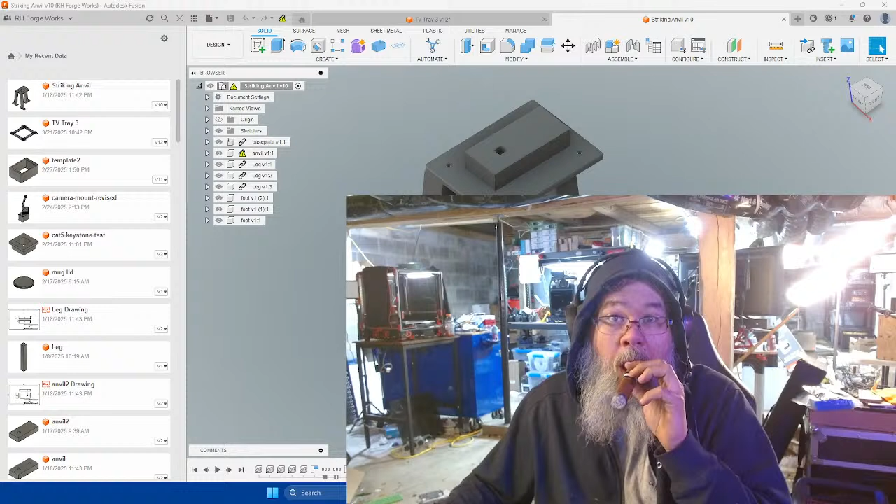See if I can make me a little smaller so I'm not taking up so much space here.

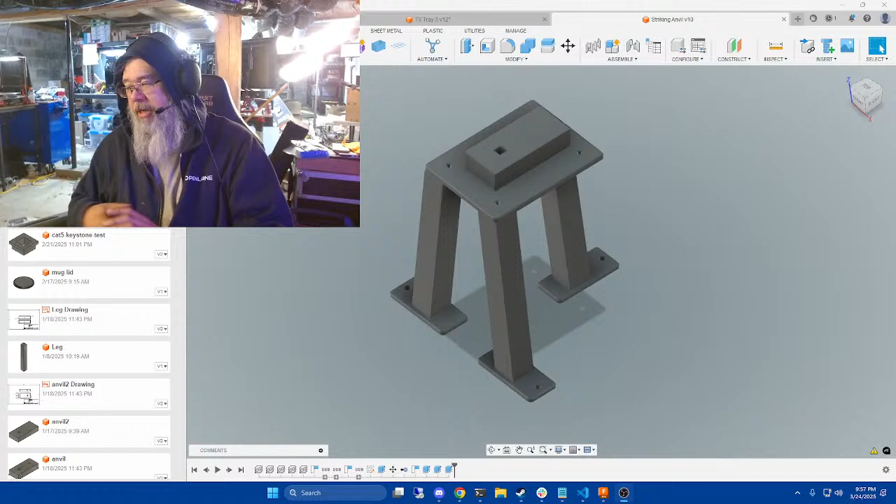Kind of done this before. It's kind of gonna, I'm kind of gonna. What you kind of gonna do? So I really had no major plan. I was playing with something in OBS, trying to make things not suck. So anything I can do before my next actual forging stream, if I can do that now and clean some things up now, that's what I'm trying to do.

I did get some new goodies for the stream. Unfortunately, no new cameras, because some asshole decided he wanted to run the auction bids up to like $200 on these cameras, which I wasn't going to pay $200 for.

I was hoping to add 3 or 4 new, but they're not really new. I mean, they were like top of the line in 2011. They're not so much top of the line now, but they would have been a nice addition, just not to the tune of $200 a pop.

So I stopped bidding on those once that dickwad decided to start running the prices up like that. If that was you, I just want you to know you can go fuck yourself. I don't necessarily think that was any of y'all, but you know who you were, Mr. Green, or was it Grass Valley LDK 3000, running that shit up to $200.

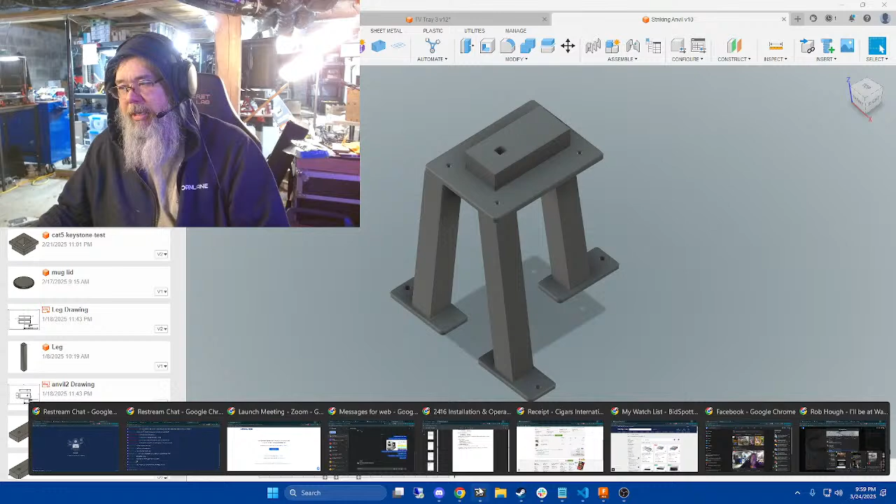Yeah, I got something for you, I got two of those for you, by the way. Two of them. That dude, it was no bueno. Honestly, just looking at those cameras, I mean they would have been handy, but I don't necessarily think they were going to be perfect for what I wanted.

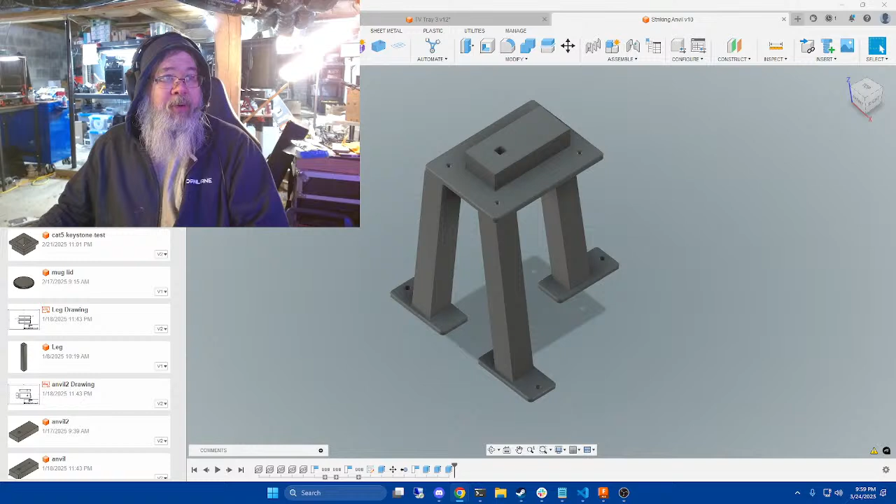Like I said, they are a little dated. Let me see if I can pull one up here real quick and show you guys what they look like. I think we're a little dated, but again, it was one of those - if I could have nabbed it for 50, 75 bucks, then it would have been a handy little addition to the stream.

So the big benefit to this camera, for those not in the know, is the SDI output, which is a bit more robust connector than HDMI. HDMI cables are really kind of delicate, so if you look at one wrong, it tends to break.

I currently have in the shop two completely dead 25-plus foot HDMI cables, so I'm going to have to order some new ones eventually. But SDI will stand up to the abuse a little bit better.

So this camera could have done some things that I wanted it to do, but like I said, $200 though, that would have been a little spicy. I'm not trying to spend that.

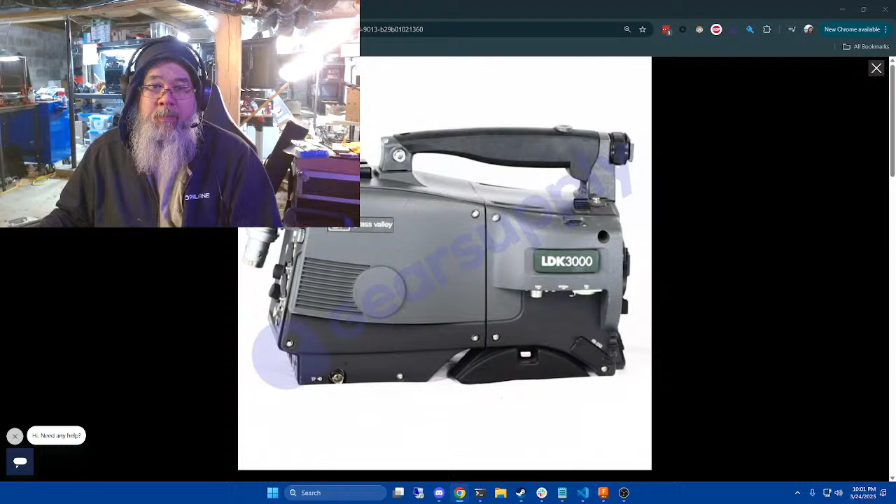I mean, if I'm going to spend high dollar on a camera, I want to move up into something a little bit better than what I'm currently sitting on, which the cameras I use right now are - what is it - the Panasonic G7s, I think, are what I'm using. Let me pull one up just to check. Yeah, that looks like the camera I'm using now. I'm pretty sure it's a G7. There's not a box sitting right here.

So the two anvil cameras that I typically use are... it's a pretty good camera though. Most of the issues I have with the camera are because I'm a moron, not because the camera sucks. It's mostly the operator. Every time I've actually sat down and read the documentation or looked up some stuff on them, I've had no problems.

But that's a pretty decent camera. I mean, it's a little dated as well now, they're a little older, but you can get them relatively cheap. This is a GH7 - this is not the camera I'm using. I did not pay $2,000 for that camera, by the way. This is more like... this is a G7, there it is, so this is closer in line. I still didn't pay this much for it, I got it cheaper than that. Like I said, it's a little older camera now, so you can get these cameras - not for $50, but relatively cheaply now.

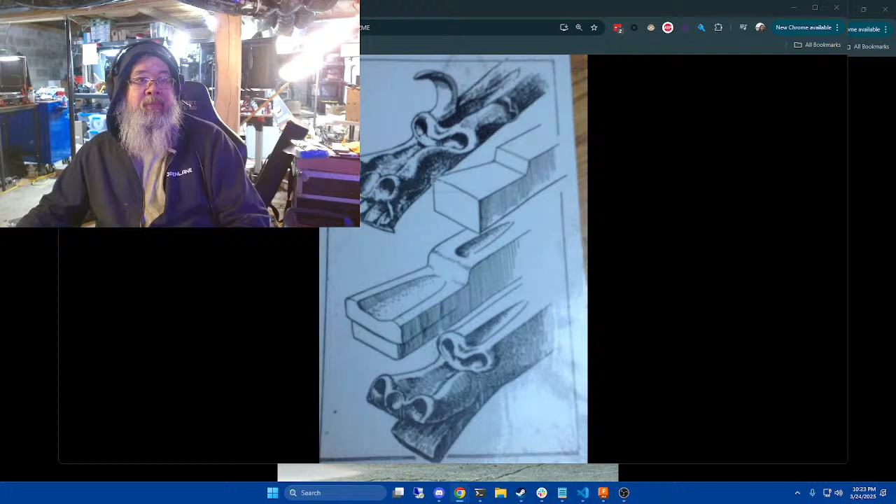It's great. So another thing I considered, I've not ruled this out yet, for the foot, is to do a dragon's head on the end and make that kind of the foot. I thought about that a little bit, but I don't want the horns. I just want something different, just something forged that when people look at it, they go, 'Oh man, check that out, that's forged.' I just think it's kind of cool.

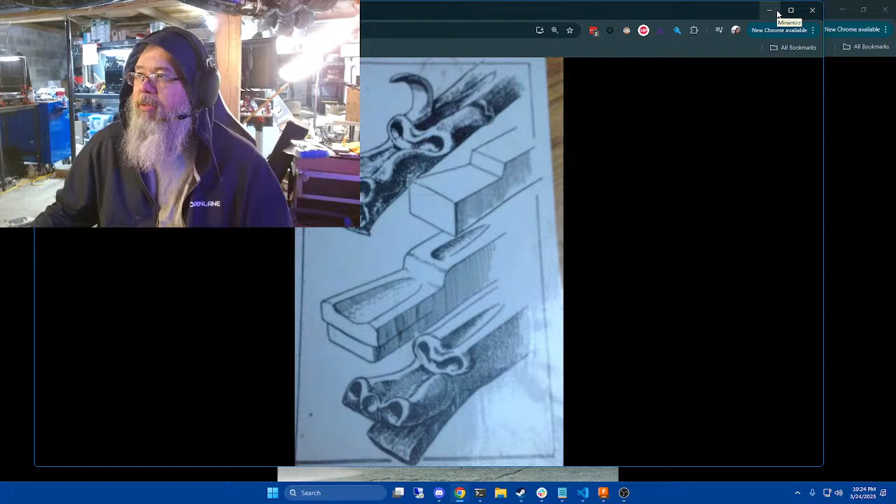I had originally thought to myself, man, I'm not forging this table, that's dumb, I'm just going to fabricate something. But the more I thought about that, I realized I'm not into the nostalgia of things for the most part. But at the same time, this forge table is big enough and cool enough, it deserves more than me welding a bunch of big angle iron together. Honestly, I'd rather save that stuff for some swage stands anyhow. It just commands a little respect. And that forge, I don't ever intend to really move anyways.

So I actually have one in its place right now. It's a cast iron forge table, not as big, but it's there right now. That one's going to get moved for the big one eventually. I'm gonna guess that thing weighs every bit 500 pounds. When I pick it up with the tractor and hit a bump, the tractor goes rocking and rolling from that momentum, that weight bouncing on the forks. Yeah, it's a heavy thing.

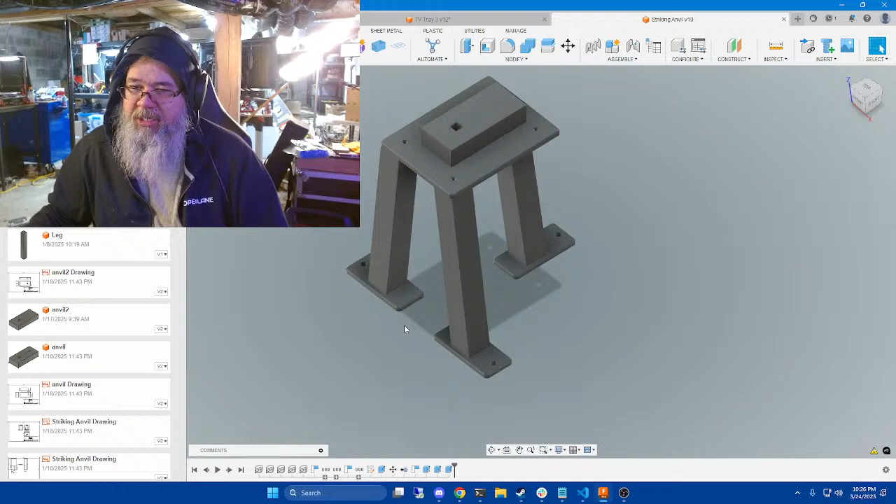Let me see if I can find... oh, that reminds me, striking anvil, we're not gonna go over that, we've talked about these a bajillion times. Let me just reiterate: no, please do not use forklift tine for your striking anvil plates. Please don't. If you want to use that for a keyed-in anvil, that's cool, that's fine. But trying to fix these when you've dinged up your hardy hole, when somebody's put forklift tine up here instead, man, it's just brutal, dude. It sucks. Just don't. Stick with mild steel.

You're not gaining really much of anything by going to forklift tine. You're not. I get it on a keyed anvil, I get it, I suppose. I mean, if you're gonna do that though, you might as well get the damn thing hardened. If you're gonna go through all that. But my mild steel keyed anvil is fine, and it doesn't take much to clean up if I need to. It really doesn't take much to clean them up. So that's the keyed anvil.

I got a TV tray in Fusion here I was wanting to look at. This is kind of funny. Here it is.

There it is. So my greatest accomplishment with this infusion project was figuring out this joinery and these damn things.

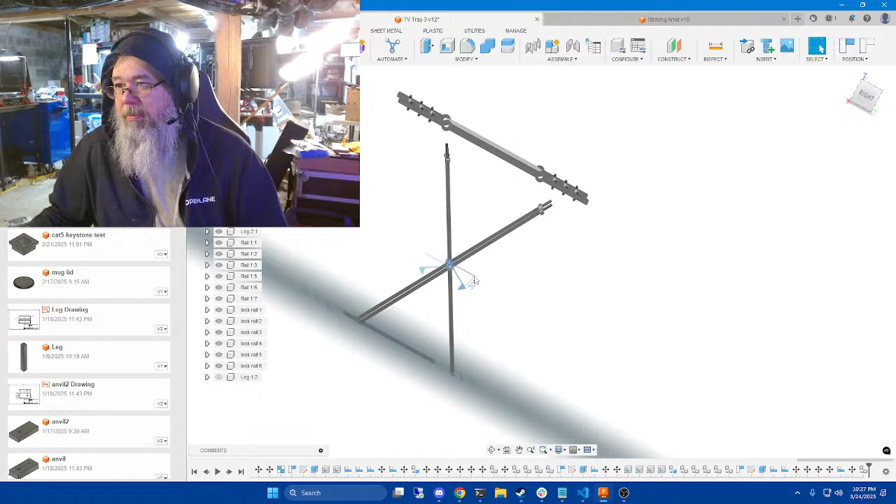It's not working right now. I don't know if I'm clicking on the wrong buttons or what I'm doing. But I got to a point where I can move these in and out independent of one another. I don't know why it's not working now.

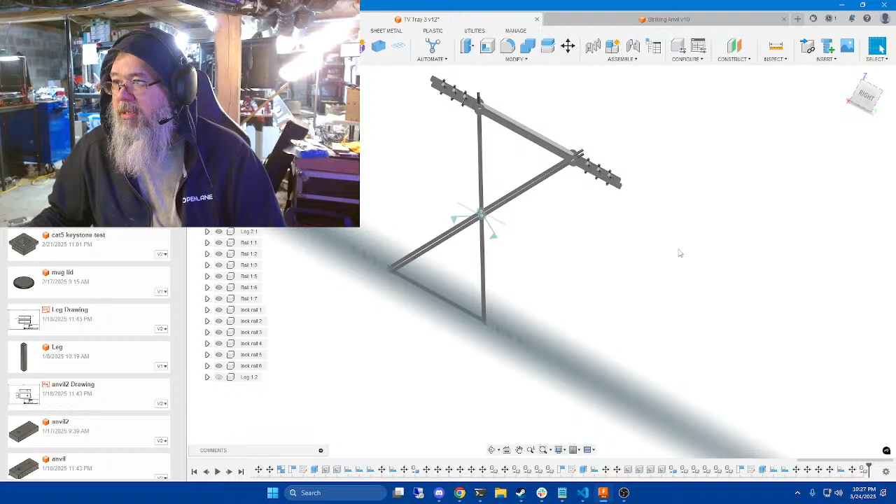What's nice about this is I realized one day that I could actually send these rails to Send Cut Send, and they'll just plasma cut them out perfect every time, and have them powder coated. I'm not gonna do that, but I had a good laugh at it. Derek Melton and John Perilou poking the bear with all their non-blacksmithy stuff, doing blacksmithy stuff with their plasma tables. I thought about this and realized I could actually do that.

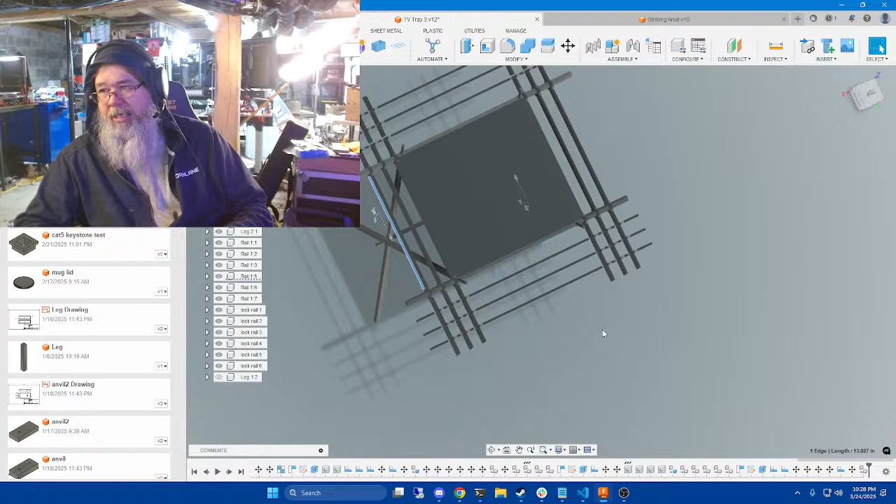It made me laugh. But if you're looking to make one of these, they're relatively simple. The hardest part is getting folks to take their time and lay things out cold. Everybody seems to want to rush through it, and that's where I tell you they tend to screw up the most, this measurement.

On this rail, because this rail is essentially what holds your legs apart and keeps it from collapsing. But for whatever reason, this one tends to get screwed up the most, and I think it's because there's an offset there that people don't account for sometimes. They just measure it once and then they screw up. Every time we've done a class with these, that's the spot where people screwed up.

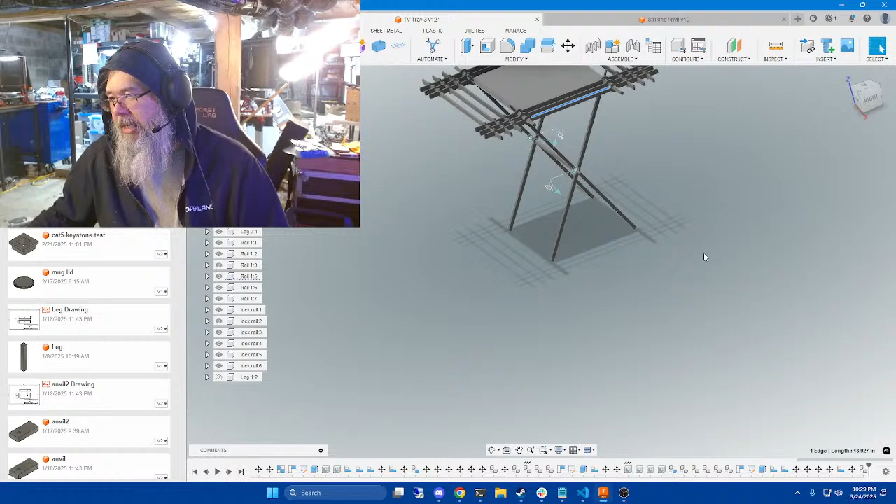But yeah, just take your time and lay things out cold. They come together relatively easily. There are little tricks you can do to make it easier, but it's not that hard really, it's just a matter of taking your time.

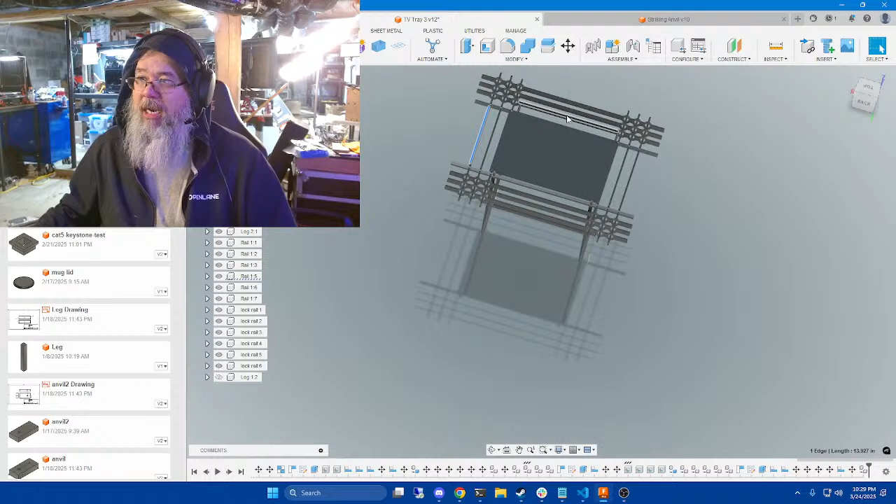If you use quarter by half versus quarter by three quarter, the biggest trick is if you're not dead nuts on the quarter by half, boy will it tell on you quickly. Where the quarter by three quarter, you've got a little bit of fudge room, so you could be a little off and get away with it.

I will say, Brian had originally suggested using the quarter by half, and I thought he was crazy simply because of how much harder it is. But what I've come to realize, having done one with half inch rails, is they don't look really that dramatic when you open those holes up. The half inch is really dramatic, really stands out versus three quarter.

Three quarter, you almost got to open it up to 7/8 to get that same kind of wow factor, which you don't really need them open that big. But yeah, you just really want to take your time, get everything laid out cold, and then execute. Be very deliberate.

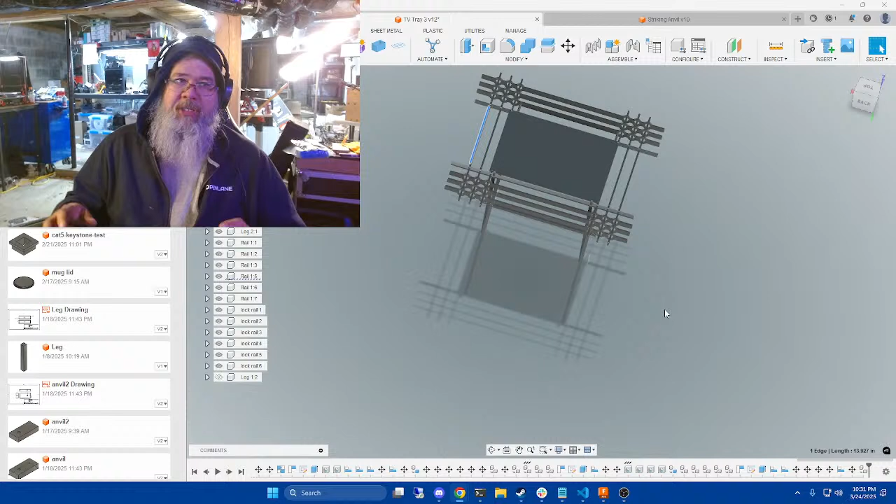I have found once you start to get into the rhythm of it, you almost kind of find yourself in a zone, and you just start doing the thing. And if you've got an induction forge, let me tell you, an induction forge makes these kinds of projects very, very easy.

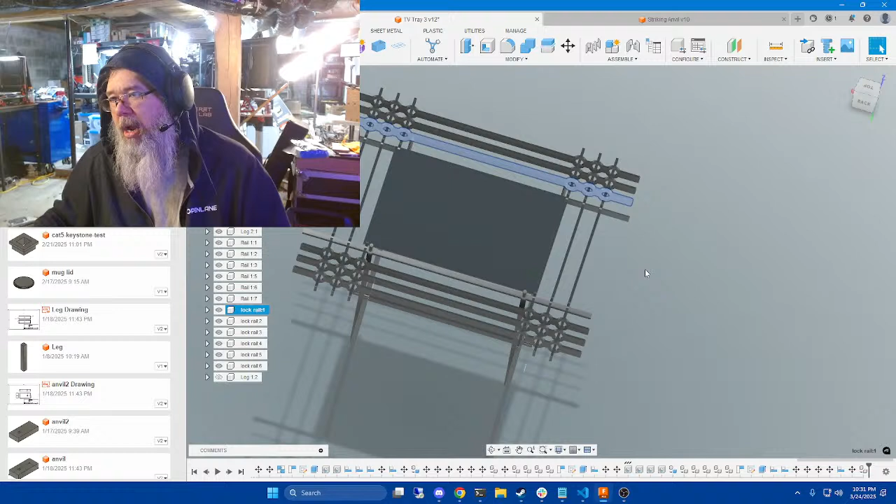Because you're going to be able to isolate your heat right on this hole, right in here, at a very high heat. So you can do a lot of different things. I've also found, one of the things I did on one of mine is I forged a horse head on one of these rails just because I wanted it to be different.

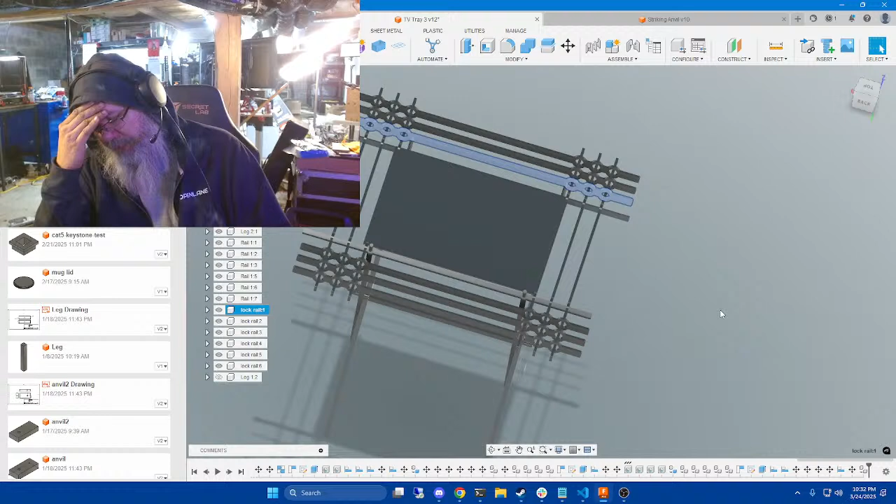I get that way. I know enough about myself to know that I'm one of those people that can't just do the thing because that's the way it was always done. I've got to throw my flair at it a little bit. I just posted some S hooks, and I hate forging S hooks, but I had just posted some on Facebook that I'd done. Same with those S hooks.

I always look at things like that and try to ask myself, how could I do this a little differently, and step outside of that box, and make this what it's supposed to be, but make it different enough to make it stand out a little bit.

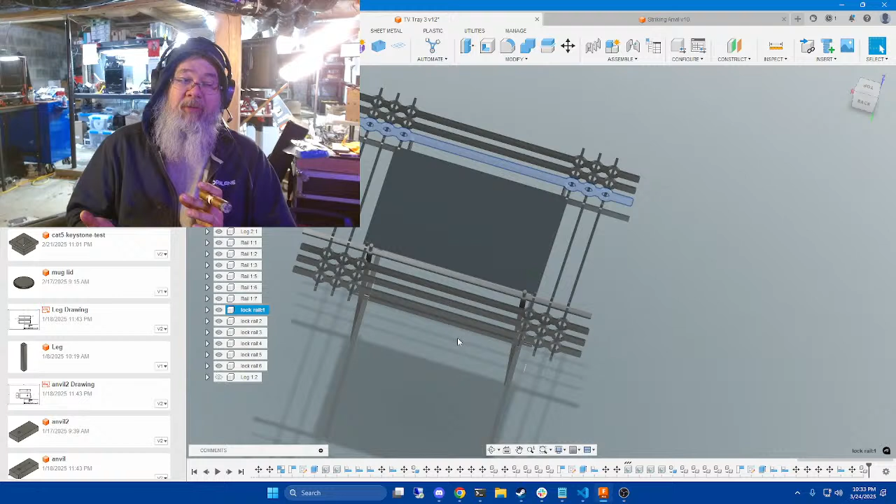From a forging perspective, one of my favorite things to do is drastically change the cross section of the material and leave the original material there so people can look at it. I think it's what I love about doing hammers, especially if you stand up an original billet next to one. You see that transformation.

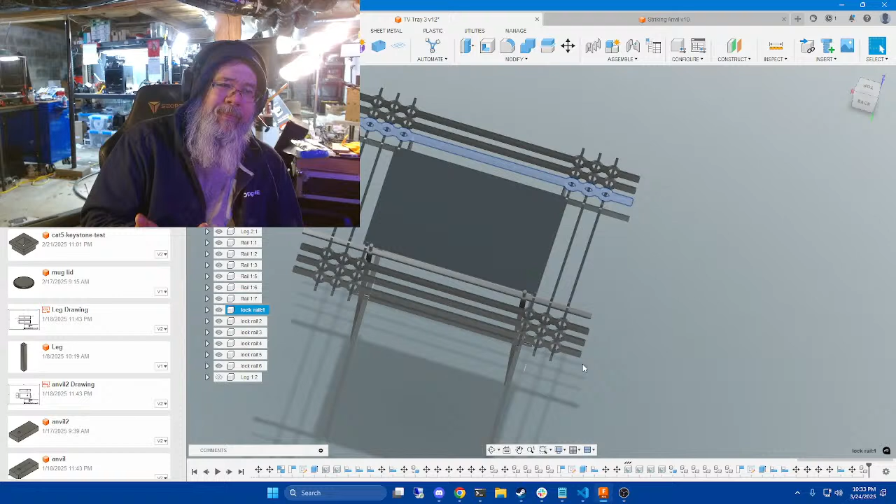I did an S hook like that, quarter by three quarter, and I left a little portion of the three quarter by quarter intact in the middle, just to show that that's what it was. I did a similar one at Coal Iron Works on one of their hammer ends. I took a piece of half-inch bar and did the same thing, but left it a true half inch in the center, then did the rest. It's one of those things where your everyday person looks at that and has no clue what's going on.

But a blacksmith would look at it and go, 'oh damn, check this out.' They would be in the know, most of them would be. So that kind of stuff, I like that kind of crap.

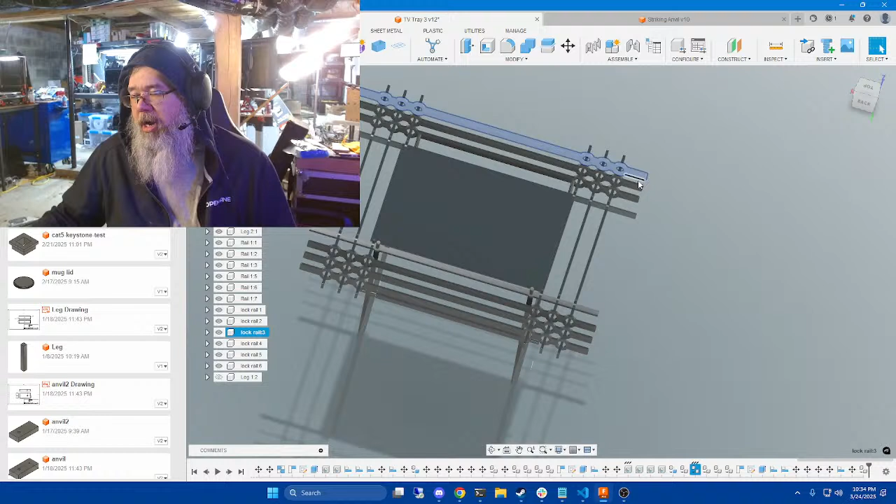Anytime you can, you know, your TV tray is going to work just fine like this, but I forged a horse head on the end of one of these bars just because I wanted it to be a little different. I wasn't even sure it was going to work, and it worked fine. You can see it, and it's there.

An induction forge will make this kind of project easier. It doesn't have to be a TV tray per se, but if you're going to do this many pass throughs, it makes it so much easier and saves you a lot of time. I can't tell you how many of these rails I have burnt up in a coal forge. Nothing's more frustrating than punching 6 holes in a damned rail and then burning the thing.

Oh, you want to hear Rob get spicy? He wants to hear how spicy my language can get. Be in the shop when I do that.

There's at least 3 of those in my river now. I think they made it to the river. Several of those have been chucked from the back door of my shop, followed by a lot of expletives.

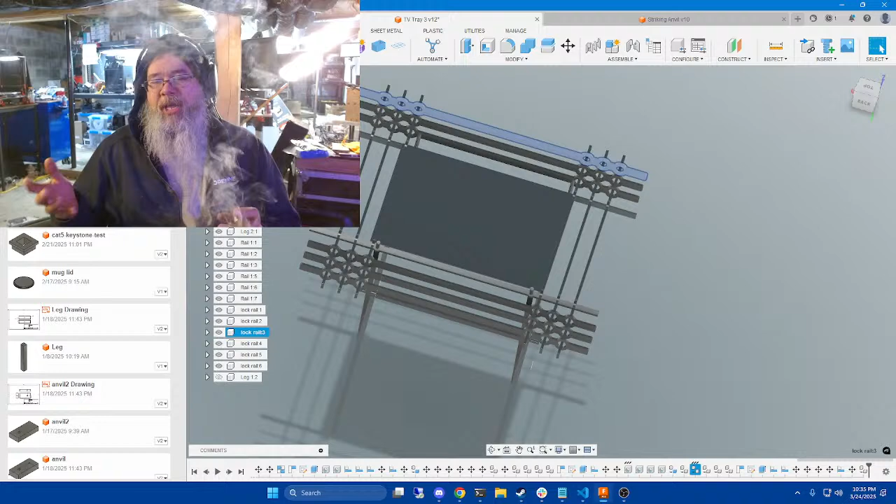Brian, the forge table thing, that's what led to that really. I remember you telling me about doing that, even with the other ones, and I was like, why can't I? Then I saw the picture of that one table, whoever made it. I wish I knew who had done this, I can't remember who it was. I would totally give them credit right now.

It was just one of those things I saw on Facebook once and grabbed a screenshot of it. As soon as I saw that, I was like, oh wait a minute, that's exactly what I was thinking about doing. So it's like sweet.

It's a relatively simple forging. The only difference is, if you're familiar with a blacksmith's post vise, you'll notice there's a transition going from the top of the post down into the leg. I want to do something similar here. This was just taking the corners off down here essentially, but there's a little transition there. I want to try to mimic that transition.

I think it's pretty well executed on Columbian vises and Peter Wright vises, I've seen it on, but definitely Columbian vises really have it. It's really done well on those.

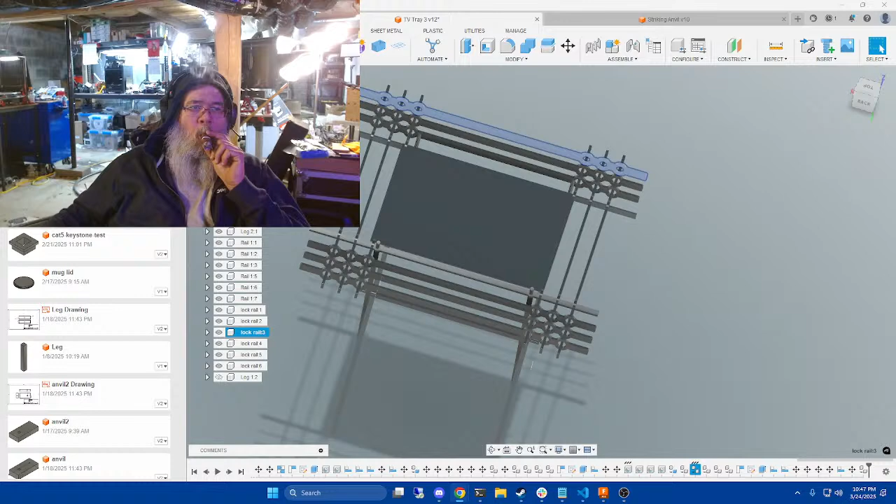Brian's got some great pictures of stuff like this. In fact, it's essentially a storyboard on how to get to that starting shape. I've made a few of these, I've butchered many too, but I know what needs to be done. Executing it, that's a different story, but I know what needs to be done. And that's all great thanks to Brian being as generous as he is with sharing this information.

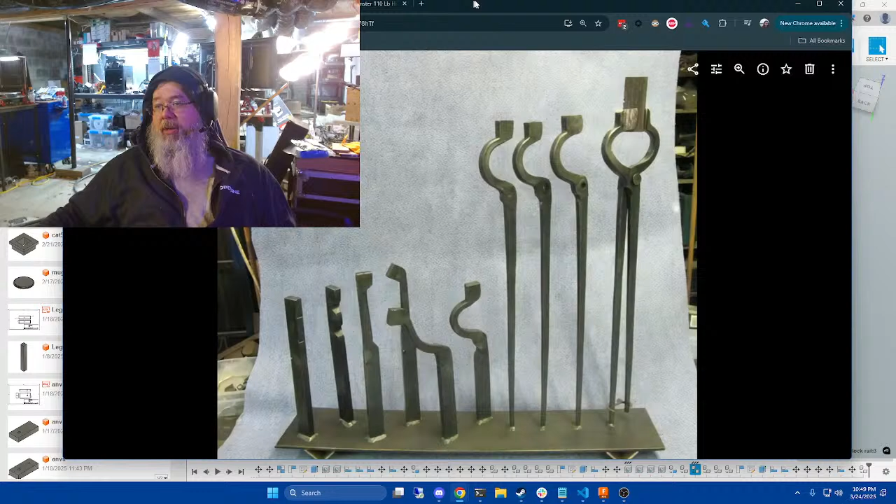But anytime I see a storyboard that somebody posts, I will grab screenshots of it so I can hold on to it for later. Like here's one of some tongs that I was like, oh hey, look, that's a great little progression for these tongs. It's like, oh yeah, that's pretty sweet. I'm gonna save that, that might come in handy one day.

I haven't made these yet, but it's just stuff like this. So when you see stuff like this, I would highly recommend you take screenshots of it and keep it somewhere you can get to it and go back to later. It could be inspiration, or it can inform on something on how you might want to try.

Here's one from, oh, who was this? This was Toby Glowers, Toby something, I'm sure I'm butchering the poor guy's name. Toby Forbes Gower, that's who that was from. He was working on, I think, a big mirror piece with those types of elements in it, and I was like, oh man, that's pretty sweet. I'm gonna save that. I've never made it.

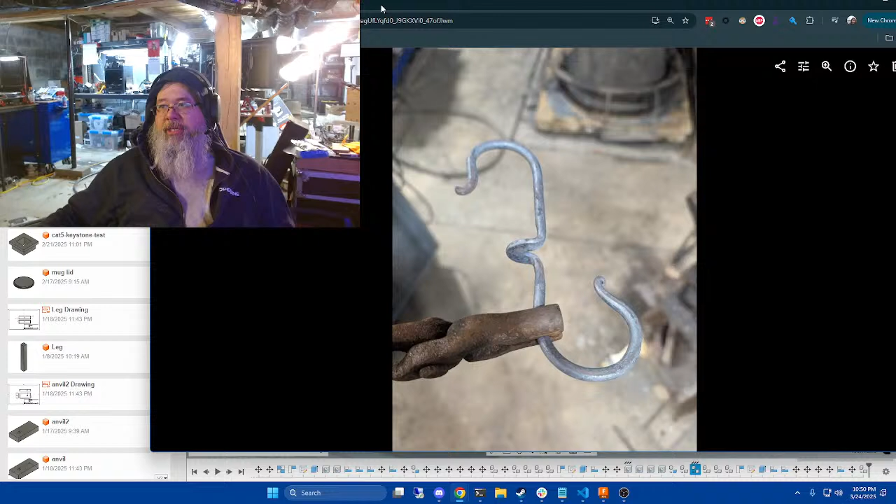Here's another example of something I did: S hooks. Going back to doing S hooks and breaking away from the traditional style, somebody had asked about this, and I had a sneaking suspicion of how it was done, but I wasn't 100% certain. So I went and did it myself just so I could speak intelligently on the subject, and I made this S hook with that element in the middle, showing them how it was done. Every once in a while you see a quote unquote challenge like that, and I would urge you to get out in the shop and try it and see what you can do.

See where it takes you. You might surprise yourself. Sometimes you could easily start second guessing yourself on some things, and then from time to time you'll do it and go, damn, hey, that worked. That did what I thought it was gonna do. And the only reason you had that knowledge is because you tried something, you had seen it before, right? I'm trying to look for an example of that.

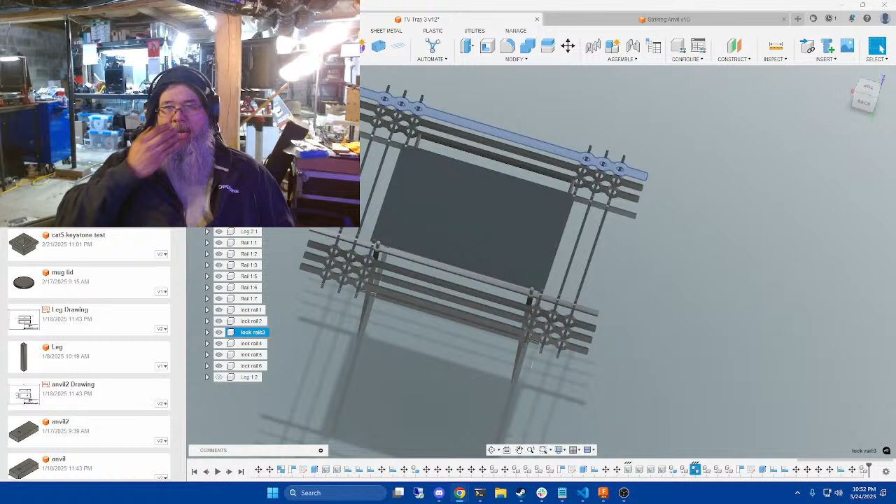We like to do one year at Quad State, we decided to do what we refer to as a large upset flower. One drunken night at Quad State we did a really bad version of it, and we used a lot of tooling we definitely should not have been using. But we did it, and Paul and I made it a point to go forge the tooling we needed for subsequent runs. So we were out there bashing on sockets, using ball peen hammers as top tools and other dumb things we might have been doing that night. But in the process of forging those big upset flowers, one day I had this moment of like, oh hey, what if we did X?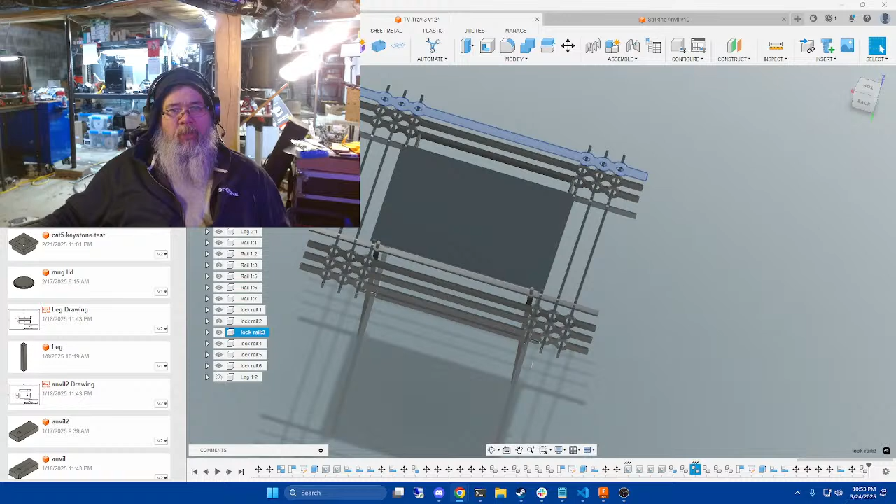What if we did X? I wasn't... let me see if I got a picture of it here. I wasn't 100% certain it was going to do exactly what I had hoped it was going to do, but it kind of did.

It's one of those things where it was completely derivative of the flower Brian screenshots I showed you earlier, to a degree of me forging those in the past and kind of bearing witness to what happens. I'll pull a picture of that up if I can. You'd think at some point I would organize all these pictures and get rid of all these half-naked ladies. I would just have forging stuff here. But hey, yeah, so let me pull this over.

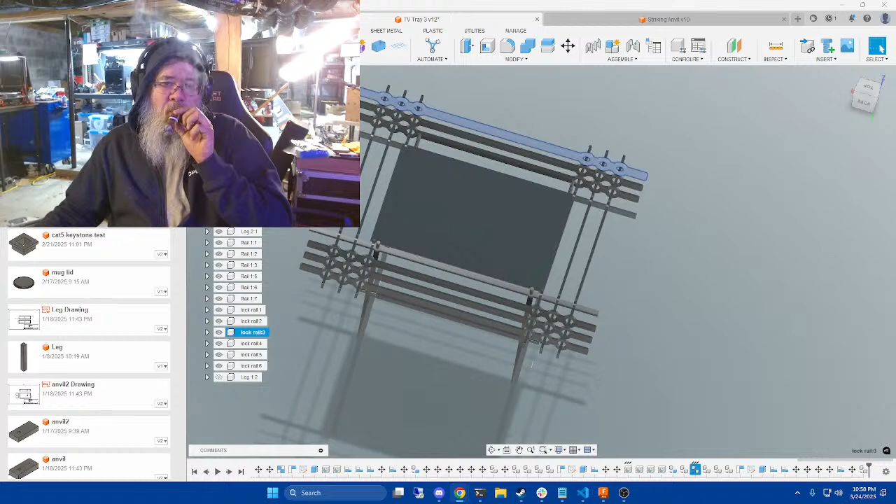That's one of the fun things about forging with Paul. Sometimes it's like, hey, we should do X, and we're both like, do we know how to do X? We always seem to figure it out. He was just here over the past day or so, and we were talking about how it seems inevitable that we'll do something like that, and the subsequent ones we do are always better because we figured something out in the process of doing the first ones. So everything we've done since has been a little bit better because we learn a little each time.

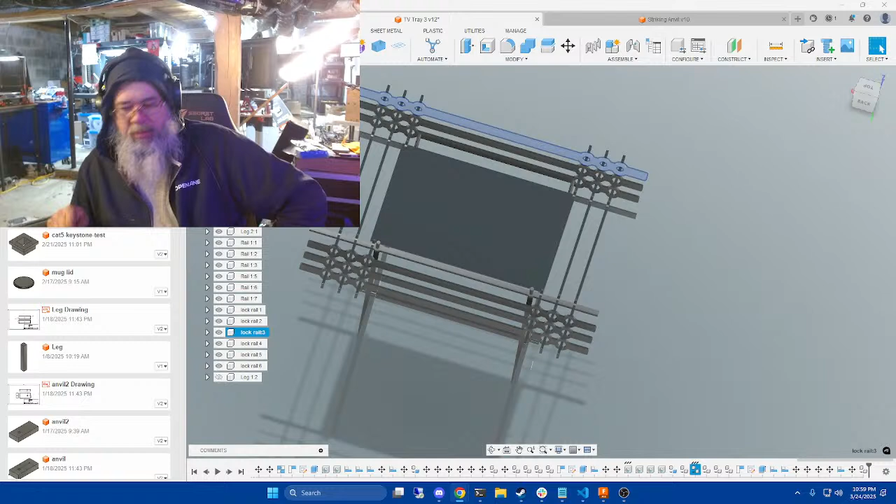All right, have a good night, Brian. You should answer your emails like I do: just hit delete, delete, delete, delete, select all, delete. My boss hates that, by the way.

But a lot of the things when Paul and I forge, some tools like that a lot of times, I'd say we're both pretty good at paying attention as we're doing it and trying to figure out, okay, as we go forward, how do we take lessons learned and apply them?

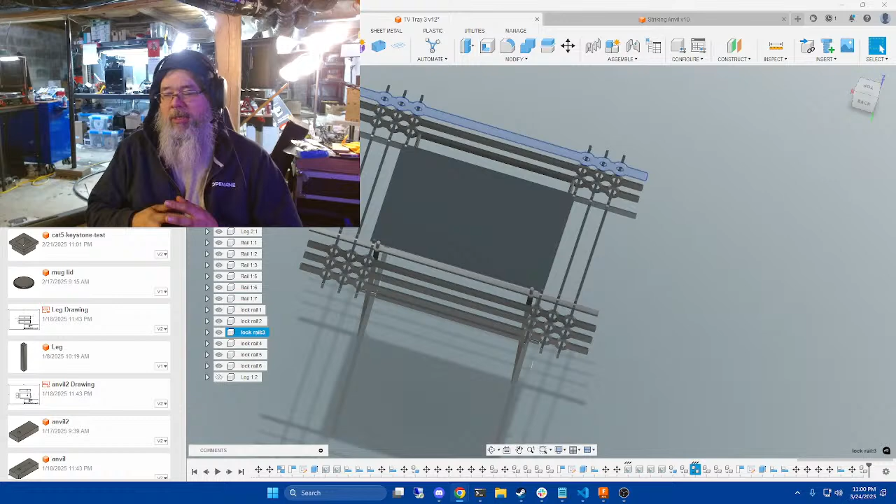I don't necessarily think I'm the greatest blacksmith of all time, not by any stretch. But I think one of my strengths, which comes from my career path in the IT world, is that I tend to be pretty good at looking at a process and learning from it, then taking from that process how to apply it more efficiently as we progress through the work.

Sometimes that stuff I've learned from Brian too, where something he's shown me will inform it. At the time when we start, it doesn't necessarily pop right up, but as we go through the process, it's like, whoa, wait a minute, if we do X, this would just give it to us.

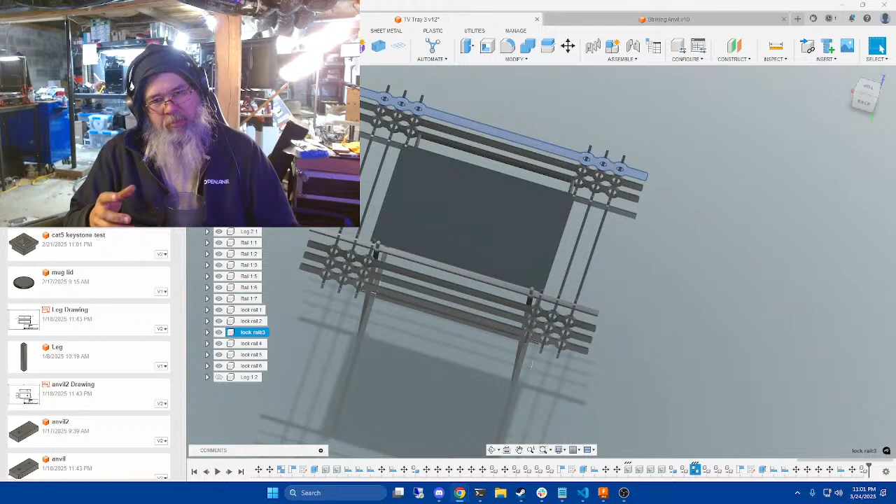We actually did that making top cupping tools a couple years ago. Through that process I was like, hey, if we just did this, it would make this so much easier. And it did - we made two that night and they both came out pretty good. Perfect? No, but if we had kept at it and kept mental notes as we worked, each one going forward would have gotten better for certain.

I think that's one of the things I love about this type of forging and the processes. There's some things where just because it's been done a certain way for a thousand years doesn't mean that's the only way to do it, or that it's the most efficient way to do it.

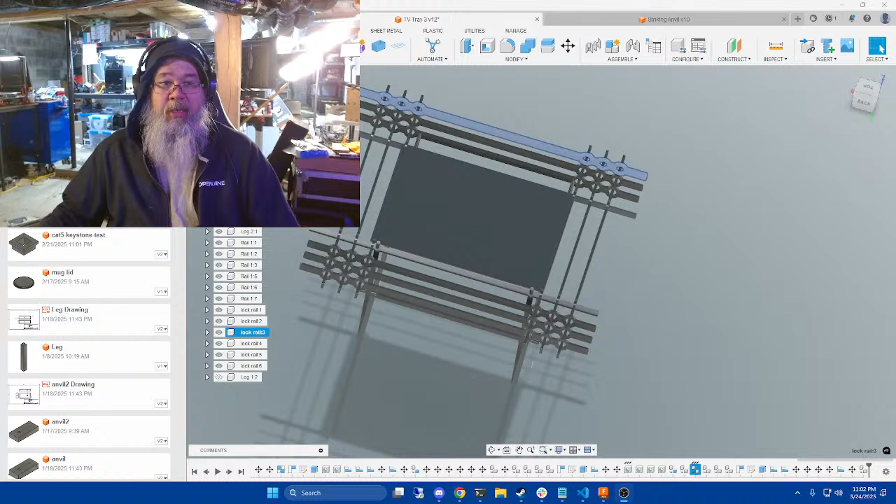One thing people need to recognize, and I think it's overlooked quite a bit, is a thousand years ago labor was cheap, manpower was cheap. You could get 30 guys, and all you had to do is keep them fed, and for the most part they're going to be happy go lucky as long as they weren't starving anymore - you were golden. So you could take as much time as you needed with these jokers to do that kind of stuff. You know, that's not really...

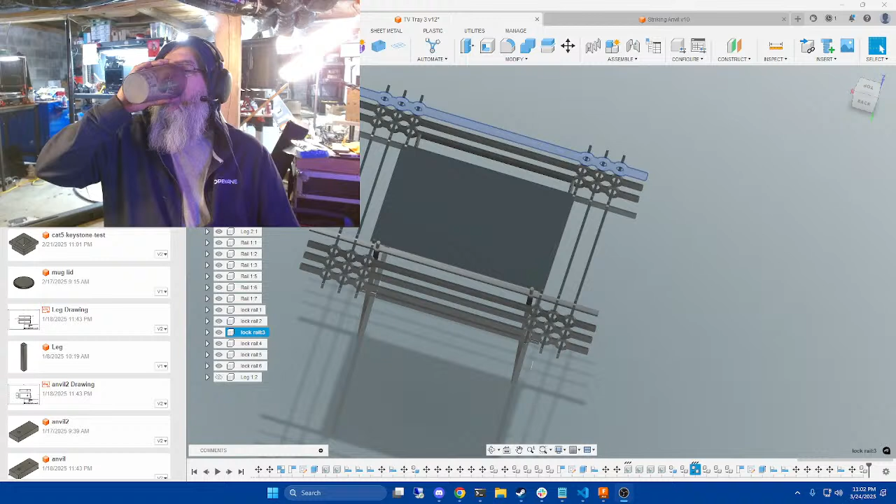How we did this originally is we used like a 12-sided or 6-sided socket, put it in there and beat the shit out of it with a sledgehammer. Like I said, not... yeah, thankfully the safety police weren't around that night. We would definitely have gone to jail.

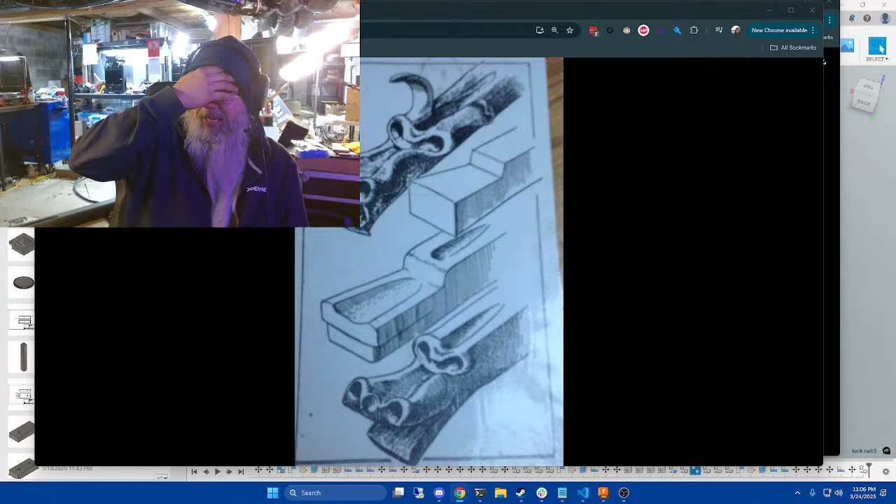It's never, there's no shortage of fun to be had. We're always doing something. It seems like that's when Paul and I have our best crazy ideas, around 11 o'clock at night, or later.

We had forged several tools to work on these flowers. Essentially, we're taking 3.5 inches of inch and a quarter round, and we're upsetting that down and making essentially a hockey puck out of it. Then we'll cut in a little bit, we'll hex that piece up, that round bar. Now that hockey puck, we'll hex it up a bit, and then we'll cut in these petals, and then we'll drive in a big round eye punch that we forged to create this area here. And then we'll use ball fullers, and I think we've got a couple different size ball fullers that we use to pull the lobes out on the petals. That also drives this in a little bit. As long as you position it correctly, you can hex this round thing here up.

Another technique that I stole from Dave Custer, instead of what we were doing was splitting the hex. What I had found was like if we split the peaks, David did that in a demo, and I thought it was really cool, and it added a very cool effect on the petals, and we did one like that. But I don't know.

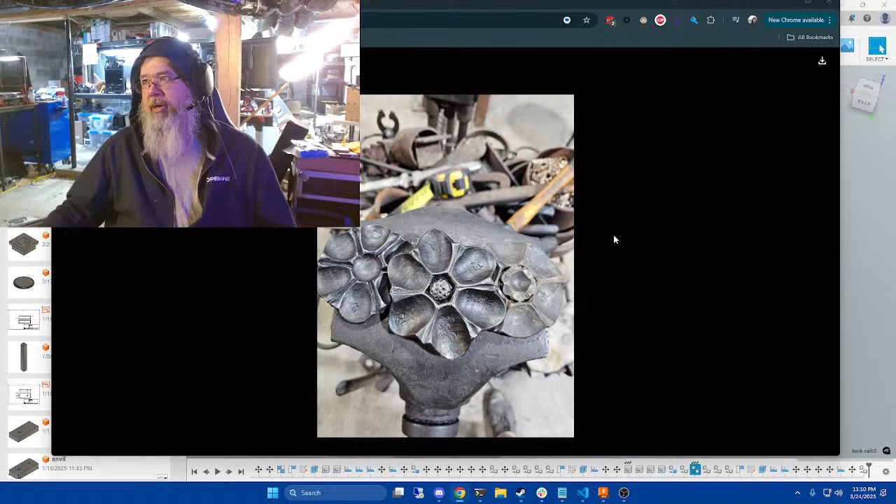But just things to think about. So if you're trying to do something like that under a press, think about what's going on and go, oh, boom, okay, I get it now. I think Brian was the one that told me that if I wanted to make a cupping tool under the press - forgive me, Brian, if I'm misquoting you on this - but I'm pretty sure it was Brian that told me, don't use a round bar to make a cupping tool under your press.

Use a square bar, and the reason being is that a square bar is much easier to centerize your ball fuller that you're going to use. It's much easier to centerize that on a square bar versus a round bar. And he was totally right, it was totally easier.

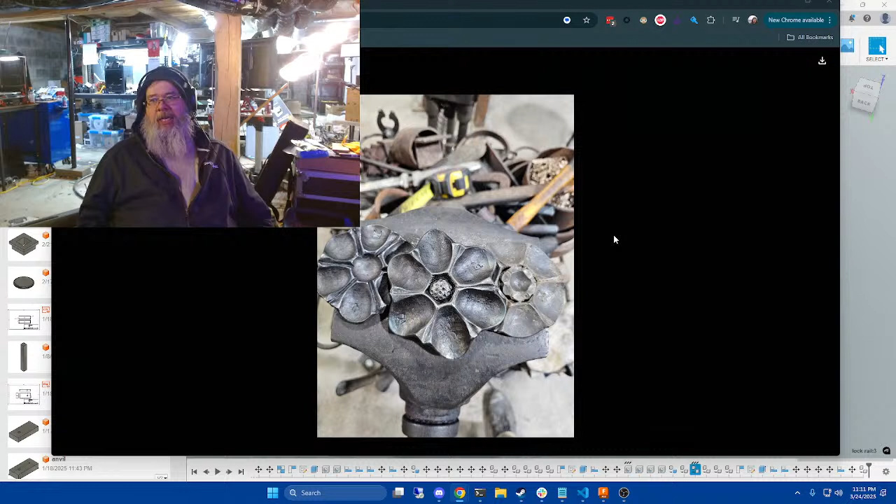I think I gave Chase Smothers the one I did in square. But to be honest, I loved the way it looked. The way it squashed down also is just cool looking. I need to get around to making a couple more of those out of square. I think they just look really cool, so I'd like to do that again at some point.

Centering it on a square bar versus on a round is so much easier. I mean, once you train your eye to do that, it can be easy. But square is just easier because you've got those corners out there—it's just kind of sighting those corners now. If you're round, you don't have that.

On a press, you don't really get a lot of second chances. Once you've done something under a press, it's really hard to correct it. On a power hammer, you can kind of cheese that a little bit. You can't really pull that off with a press.

So let's say you've created a depression in a piece of material with a press and you're off and try to move that—what happens is the press just moves that bar right back into the original depression and takes it deeper, but it doesn't actually move it. Where on a power hammer, you could technically ride the edge of that depression. As long as you're hot, you can put your fuller up on the edge of that and roll it up and hit it, and it will do the thing. A press will not do that—it's just going to push it down into the original depression.

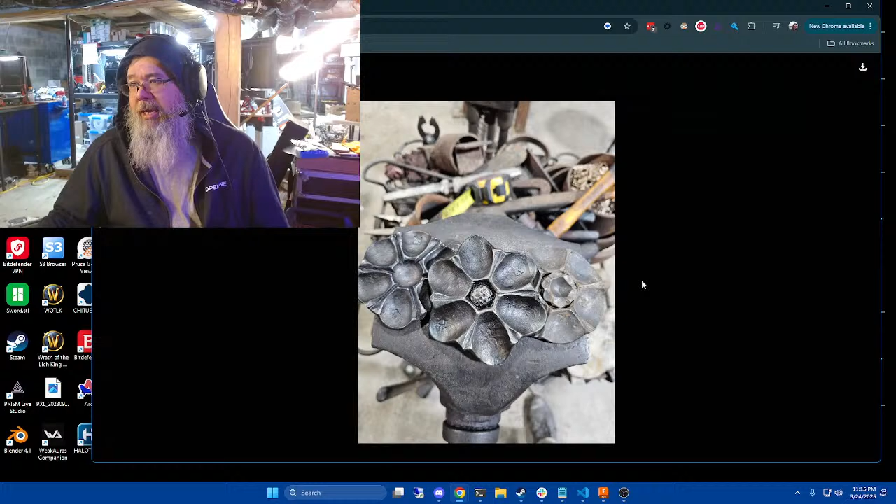See you, Paul. But it looked fun to try, and I don't do that kind of stuff, and I really need to do more of that, so when I make attempts at it, I don't suck at it as bad. Because when it comes to the scrolls, man, I'm pretty terrible.

Oh, we were talking about this a few weeks ago. Forging a ball on the end of a piece of flat bar. When he was originally describing it to me, I was like, wait, what? My initial thought was, would you just bend the end of the flat bar over onto itself, forge weld it down to get the mass you really need to make any kind of substantial ball? And then he was like, no, no, he was talking about something else, and I was like, dude, I don't fully get what you're saying. So I think what he's done is he sent me a picture of the thing.

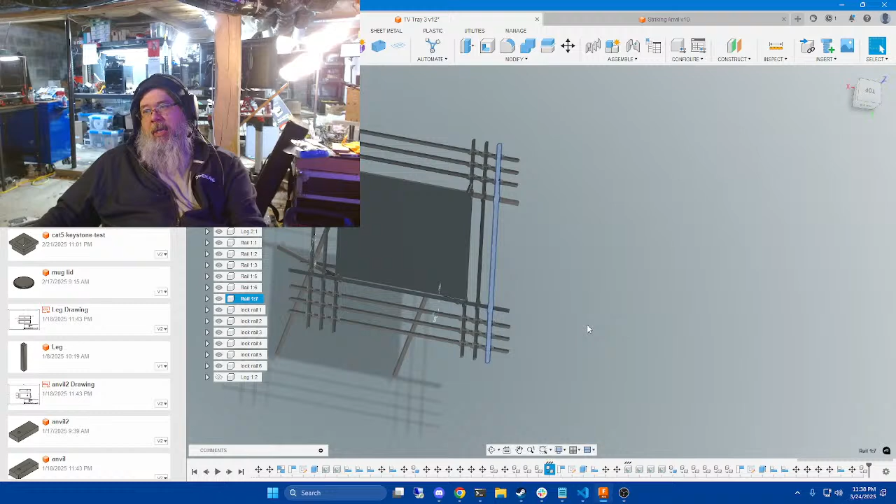and sending it off to something like Send Cut Send and have these plasma cut out and powder coated. Then all I have to do is forge the frames. I can still forge these pieces when they come back and do other stuff with them if I wanted to. But the idea of getting them powder coated, same with the table itself, I could have them do that and get it cut exactly what I want.

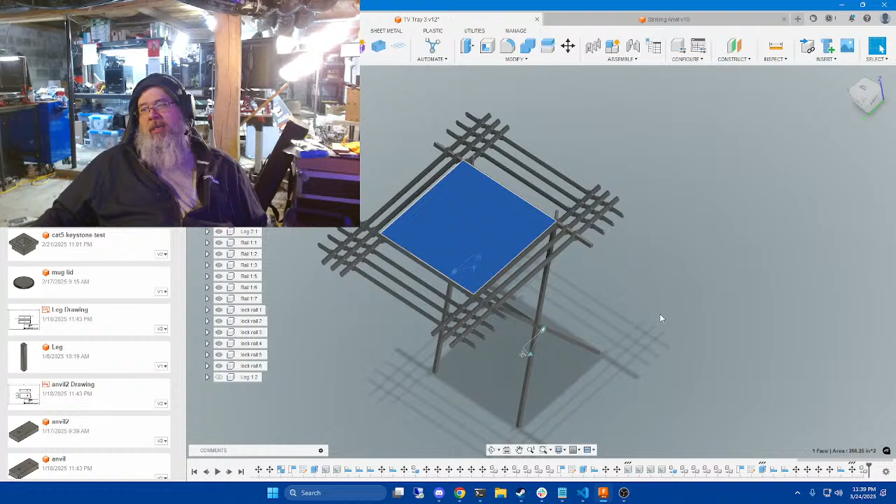So I've toyed with that idea. Yes, you can forge all of this. It's more fun, it's cooler to forge all of this. But the fact that I could just send this file off and have these things come back powder coated and ready to go, with holes perfectly aligned, makes it appealing.

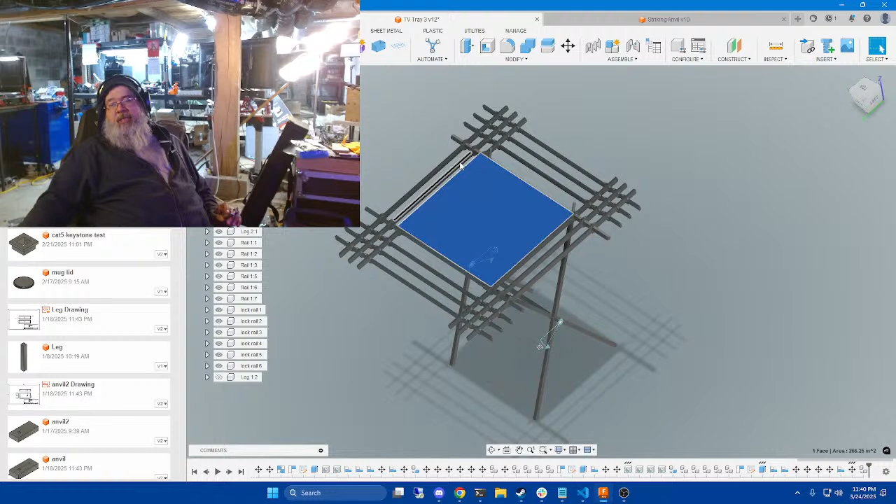So I had been thinking about how we'd go about doing a large class of TV trays, but make sure everybody goes home with a functional tray. We would still punch these, not all of them, but still go through the process, because they need to learn how to do this. What I love about a tray like this is you can keep building onto it at home if you want, but make a simplified version with pre-cut rails where all they've got to do is forge out their frame and get it constructed. Once they have it constructed, they just slap these rails in place and they're good to go.

So a quote-unquote class where the student goes home with a thing seems to be the thing. A lot of people want to take a class and leave with a finished thing, and this would make that relatively simple. Yes, it's cheating in a lot of ways, but I think you take the time to show them how to do this so they can do it themselves if they want. But here's this option of, hey, we're going to slap this together now, you're ready to rock and roll.

And if you set your TV tray up at Quad State and Hurricane Helene, or whatever the hell it was that came through last Quad State and rustifies everything you own, you're covered.

Literally, not a single thing I had at Quad State came back without rust. That did not happen. I still laugh at the fact that we were in Ohio and got hit by a hurricane. What the hell just happened? That's craziness. Just crazy.

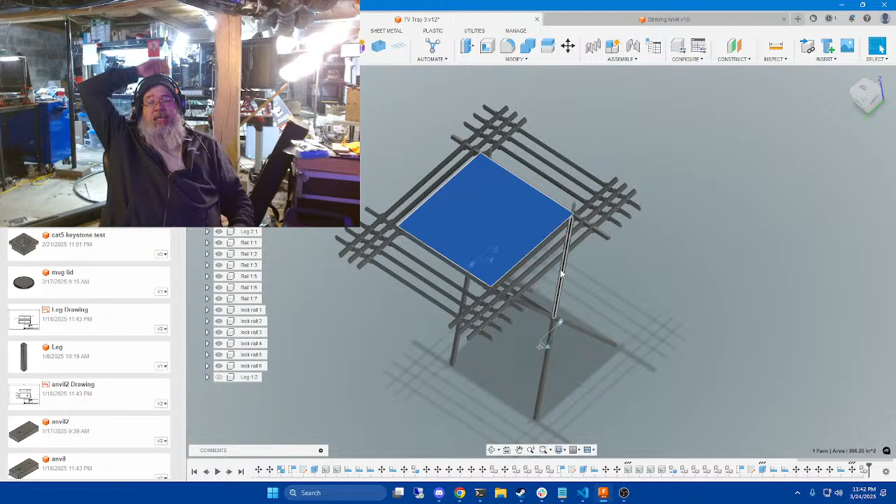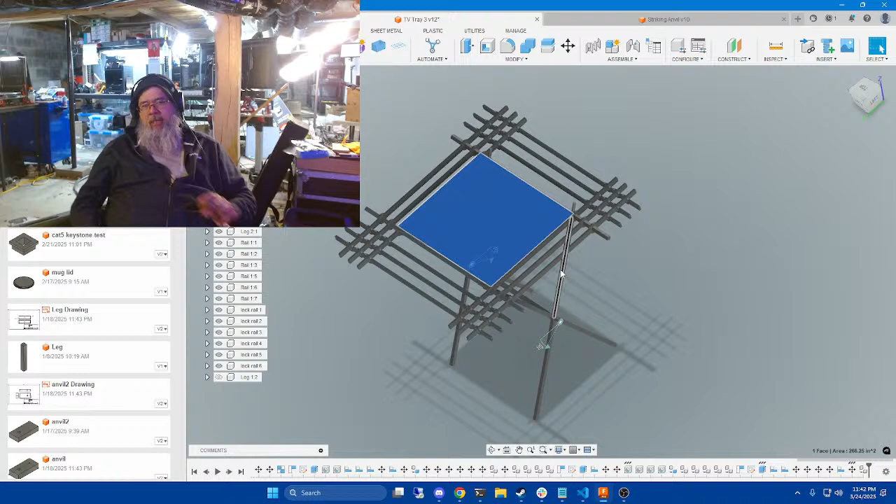Honestly, I don't know which ones they are, but they're a little taller. Those are the ones I want because I cut all of my hand tools typically at 7.5, so I'd like to be able to stand them up instead of laying them down flat, which the cans I currently use don't really stand up, but I can lay them all flat. The problem with laying them flat is you got to dig everything out to find what you're looking for, and I'm just kind of getting over that.

I don't know if you've seen mine, but everything locks in place. I'll have to take pictures of it. Along this rail here, I have a piece of half punched, and I bend it in so it'll sit flush with this piece here, and then there's a tab that sticks out, and it prevents this bar from collapsing any more than whatever I have that bend set to.

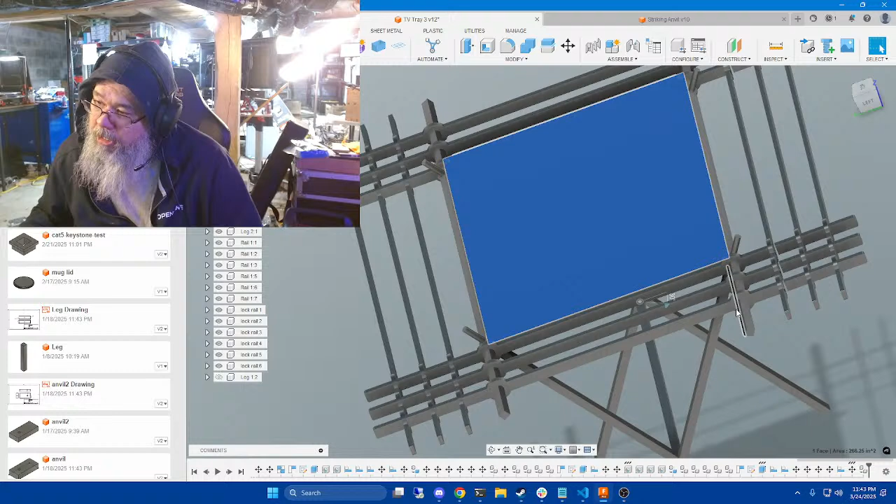I do two of those, one along this edge and one here, same thing. So this bar can only go so far. Then what I do is forge a long wedge and drive it through the holes here, and that locks everything in place, and it doesn't move. It actually worked out way better than I expected it to.

It was one of those things where I was sitting there one day looking at it thinking, what can I do here? What can I do? But yeah.

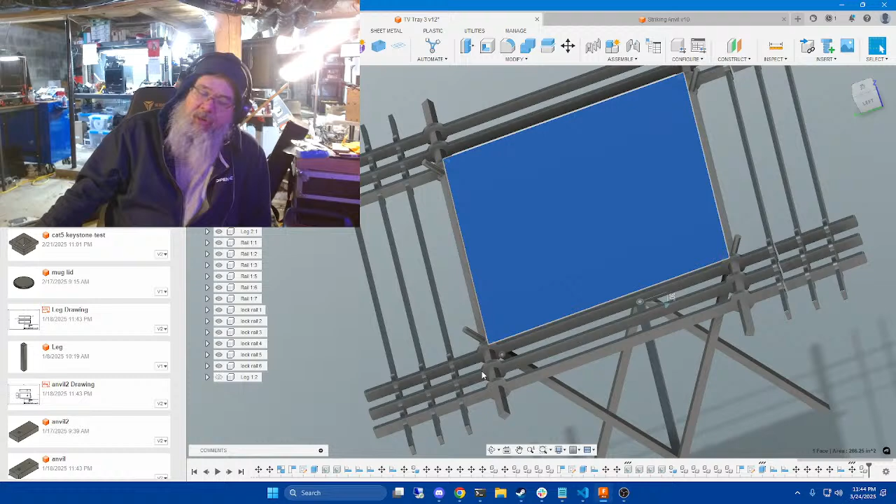What was nice about that is I left just enough space between this rail and the half-inch rail, about a quarter-inch of gap, so I can drop a rasp down in there, and it holds it in there great. But what drives me nuts is, if you don't have these done right, especially when people drop stuff down on the rail, top tools or whatever, these will slide in and out.

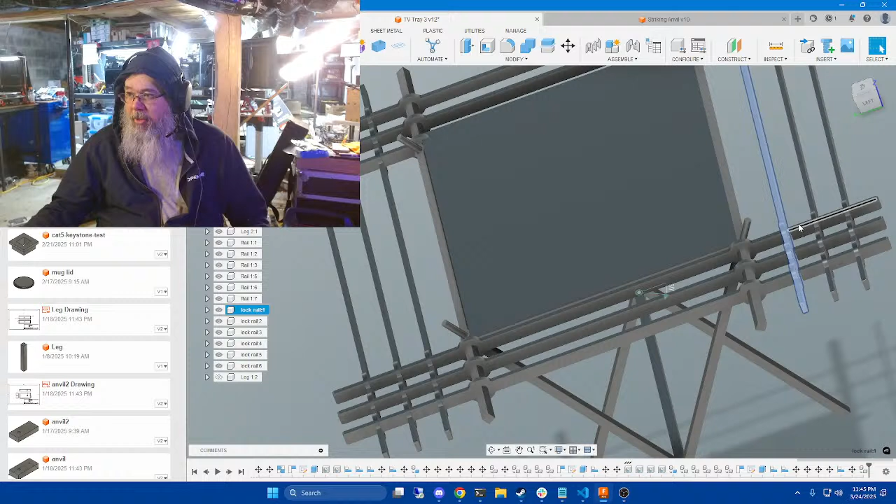The way I did that, there's a piece that comes here, and then there's a tab that sticks out from the half inch from where it bent, and it will only allow this rail to come in so far. It keeps that spacing, and there's another one out here, same thing, preventing it from moving in. Then when I drive a wedge, it goes through this pass through, this pass through, this pass through, and all the way down. Once you run that in, it locks all of those in place, so none of that will collapse.

So once you have all these bars correctly aligned, like the legs, as long as your rails here are on, this rail can't pop off, these legs technically can't collapse. You have to pull that bar off, that rail off, before you can flatten this. But yeah, it all works out really well.

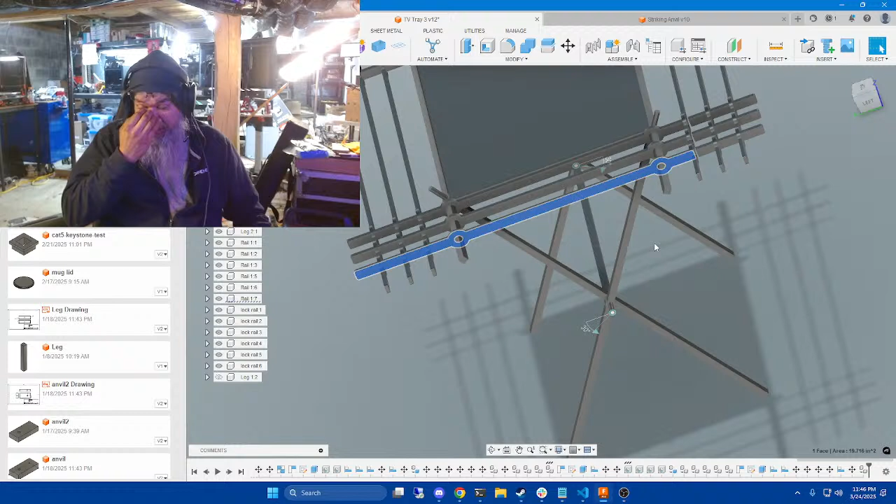I'll take pictures of that, I'll do that tomorrow and show you what I'm talking about. And it worked out really, really well, and it was super simple to do. I just marked out where I wanted those bends, stuck it in the vise, and just bent them straight down essentially, and it worked really, really great.

You still have to get the holes punched appropriately, but everything else is locked in with like a 4.5, 5 inch long wedge essentially. It just locks everything in place and it doesn't move. It's great. It's one of those things where it's like, oh, why did it take me so long to come up with this?

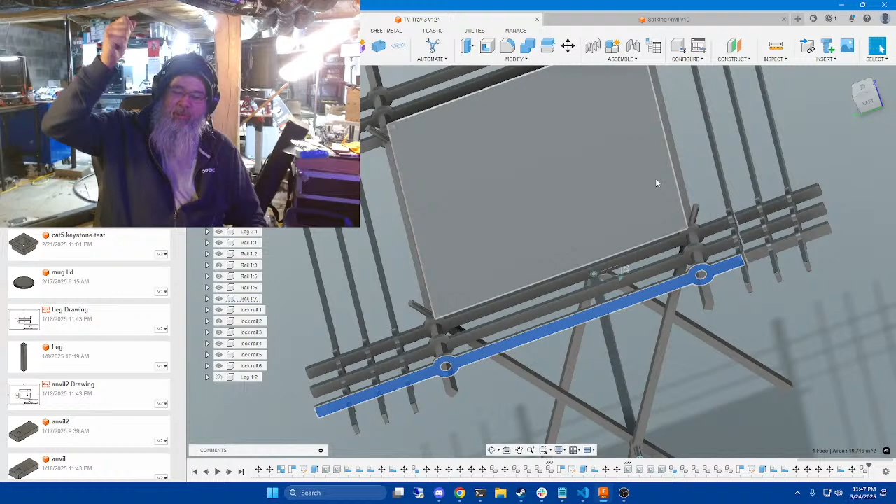But I like it because I can set a 1 inch gap. I've got it set 1 inch along this edge, so it perfectly holds bottom tools really, really well. And then, like I said, there's another gap here, big enough that allows me to drop a rasp in there, and it doesn't fall out or anything.

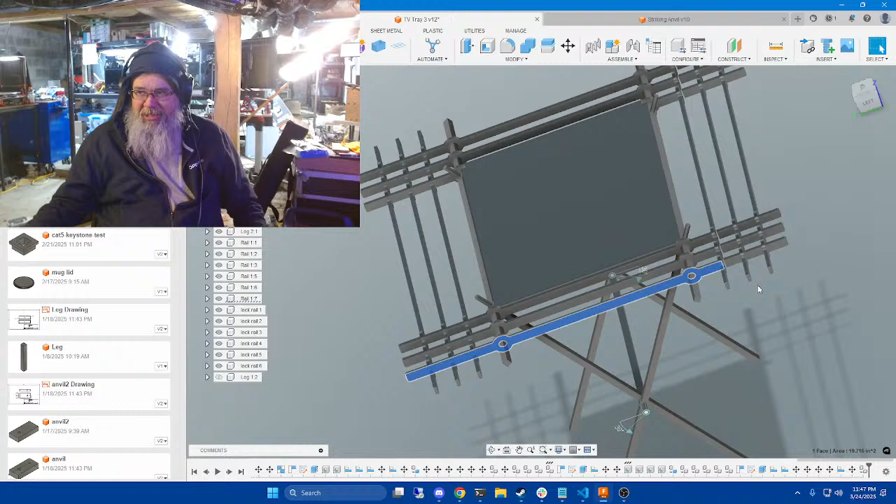I love my TV trays, but my big one is my favorite, which is why I was talking about doing more rails. I really love the intricate, ridiculous pass-through pattern that I have on my bigger one, and I'd like to make another one, but it's not for the faint of heart. It's really funny, I remember when Brian saw it, he was like, 'Well, that's cool, but why did you do it like that?' I was just like, 'Well, because the picture I was looking at, I couldn't really tell what was going on, so this is what made sense to me.' It's crazy.

Last year, I think it was last year, we really honed in on the TV tray, simplified it, and made it something a little more approachable for some people. But the other thing was we standardized a lot of the hole placements. We had figured those measurements out for people. The problem was the minute that they didn't follow those, problems happened, obviously.

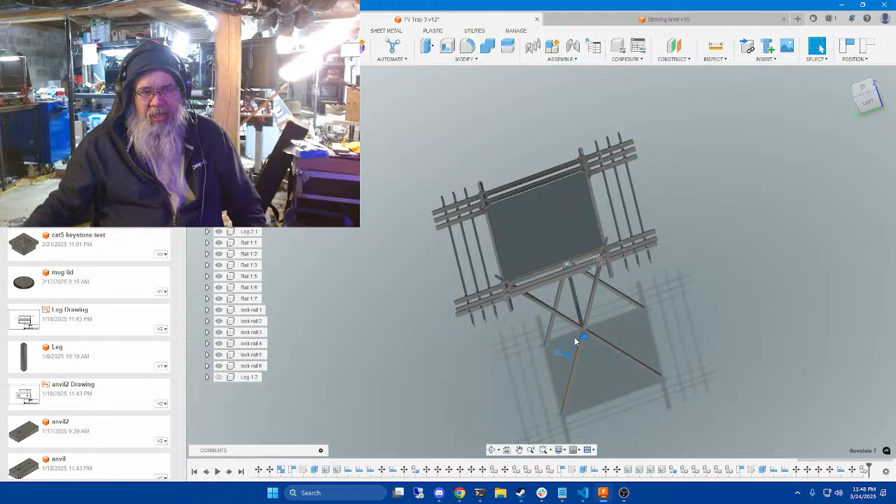But we did eight, somewhere like eight trays, over a weekend with a bunch of beginners. So I think we did a really good job on really paring down the quote unquote class and making it something that was kind of quote unquote standardized.

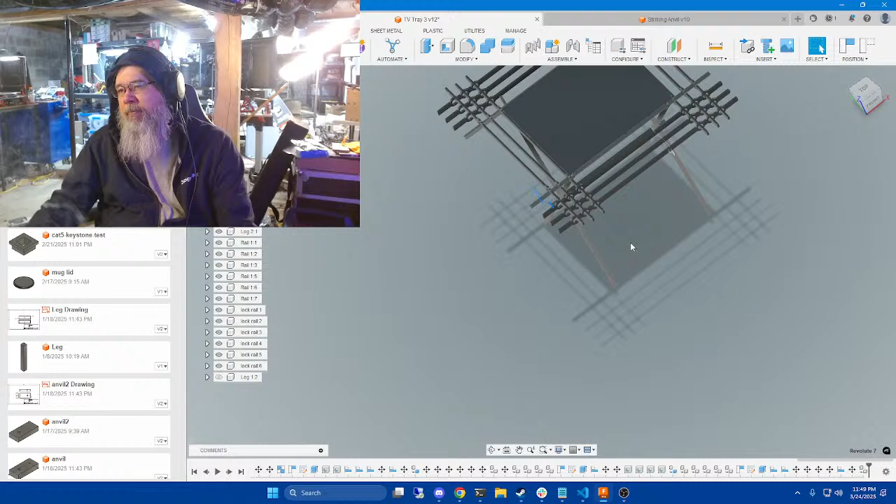But like on these rails here, there's a lot of different things you can do to lock them into place. There's a lot of different things you can do. That's what I love about the TV tray, right? You can do a lot of different things with it on your own and still have a functional tray and still build onto it. It's like a giant Lego. You can build onto it, modify it to different things.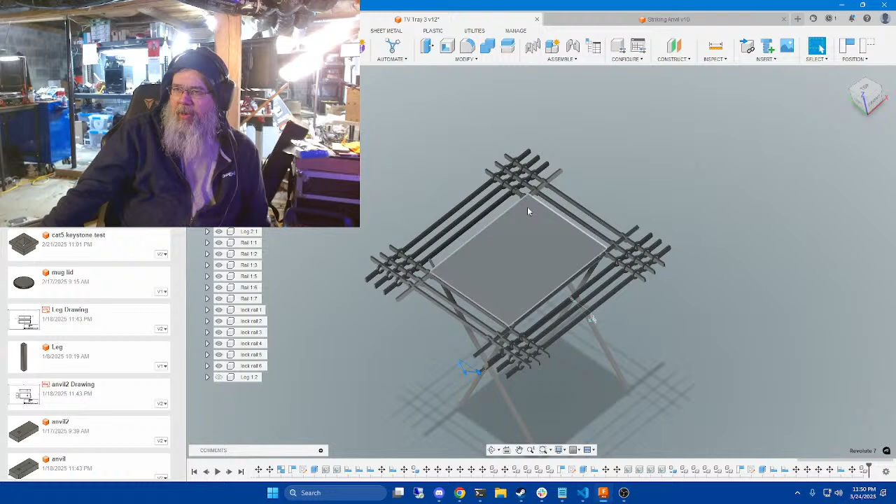Like when we did the tray class, Josh Perkins made this tray for his, like a little drop-in tray here somewhere. Some other guys did some other stuff. I think Paul's table insert here, he had his in such a way that when he puts it on, it locks everything kind of in place.

And if, like I was saying with mine, it's just essentially two wedges that are driven in here. And if you make them essentially like a drive hook, then as you drive that wedge in here, it'll give you a little hook down here that you can also hang things from, if you want to do it that way. I didn't do it that way, but it was something I thought about.

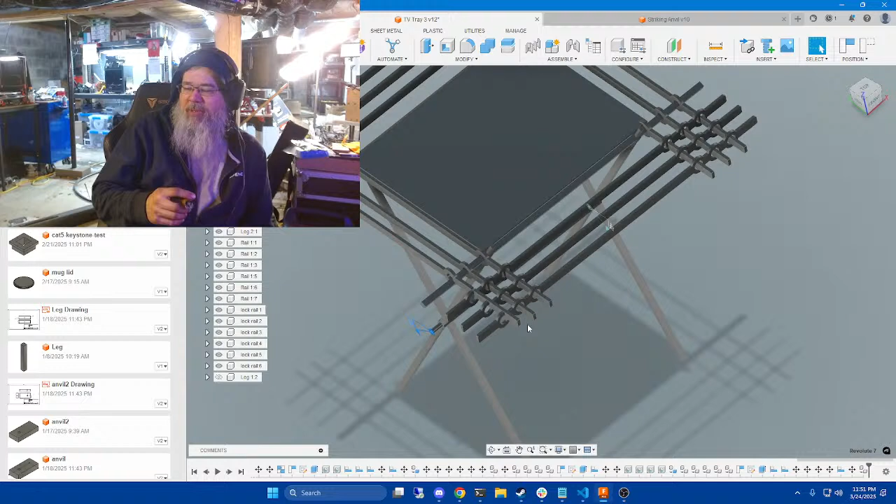Yeah, open source blacksmithing. I mean that's what I love about it. That kind of stuff is you can take it. See, it's the same with the keyed-in anvil and the keying system. You can take a striking anvil, and as long as you have the shapes and swages, you could essentially create one of those ginormous 500-pound swage blocks that doesn't weigh 500 pounds, and something that you can remove and add swages to quickly. That's what I love about that system.

And something I've been meaning and wanting to do is make different swages for the striking anvil that key in exactly for that reason. I want to really show that in an upcoming conference or demo. I'd like to have a few of those ready for Quad State to be able to show people what you could actually do with this system. It's like, look at what you can actually do with this. And I would love to sit down with Brian again and kind of walk through and talk through some of that. Where the idea for that whole keyed-in system came from, where he got that, what inspired that.

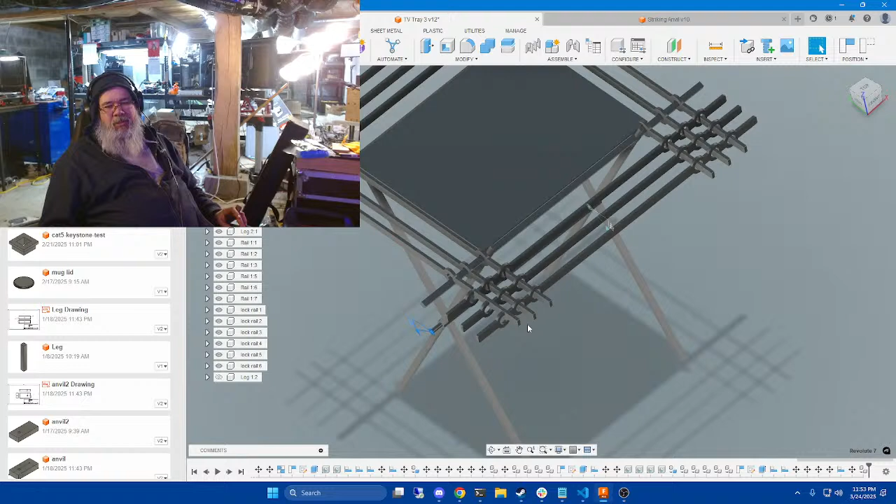And I bring that up because I remember watching years ago a Sheffield cutlery YouTube video, and the bladesmith that was working on the knives they were showing—this is like a video from the '60s or something—but it seemed like a lot of the tools he was using worked in a similar fashion, where they dropped into a table and locked in somehow, and he was working at this workbench with this anvil, like different dies that he could use and stuff, and it was really cool. I don't know that that's where Brian got it from, but I've always suspected.

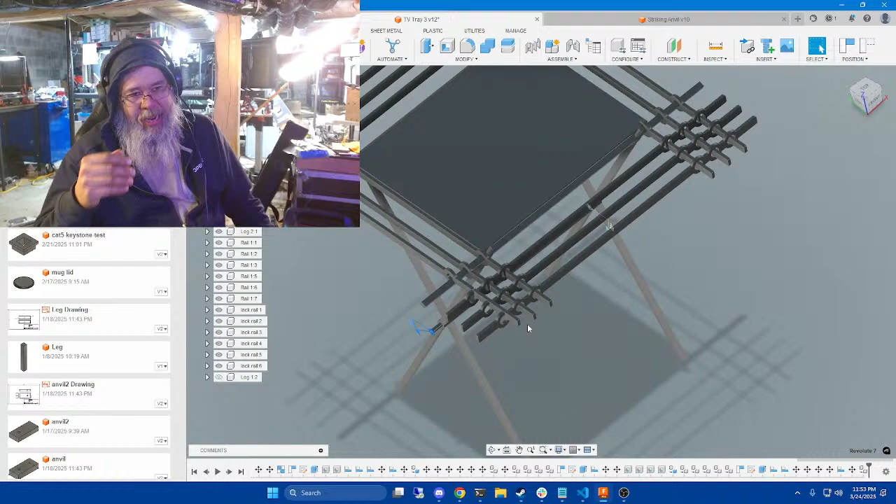I was like, man, I bet you Brian saw this and thought, what if I took that idea and scaled it up? I don't know if that's where he got it from. Again, I don't want anybody to think that's what I'm saying. That's not. I don't know.

But then I thought to myself, interchangeable swage blocks would be very cool. My biggest problem with a giant swage block is they're so ungainly to use, and I've yet to use a swage block stand that doesn't jump around and chatter all over the place. Hate it. And let's say you're working on one side of it, but you want the edge, now you got to flip it up and hope you don't break a finger in the process.

Yeah, I've still got that sitting on my tray, Jot. The half round, yeah, that's still sitting on my tray actually. I don't know for certain, I haven't tested it, but I think the key I use for my keyed-in anvil would work on that. I haven't tested it, but I should. I've been meaning to make a new key anyways, so that might be an excuse to do that.

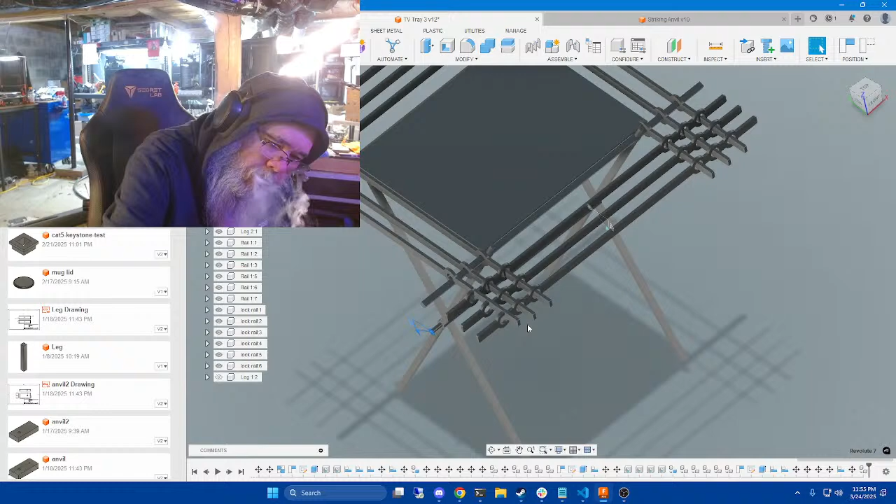My key works fine, but it has a little too much taper on one end, and there really should be much less. Think of a hammer eye drift when you think of these keys, right? You want almost a straighter taper, a much more gradual taper.

If there's too much taper, you can tell - an easy way to know is when you go to knock the key out, when it finally gives, if the key shoots out of the stem, there's too much taper on it. It shouldn't come flying out like a bullet.

But it also shouldn't require you to hit it with everything you've got swinging a 5 pound hammer at it, Corbin. You should only take a few hits - boom, boom, boom. I go for 3 hits and then 2 light taps at the end. So I'm not wailing on it, but I'm just driving it. That's always worked for me, but I've always known that particular key has a little too much taper in it.

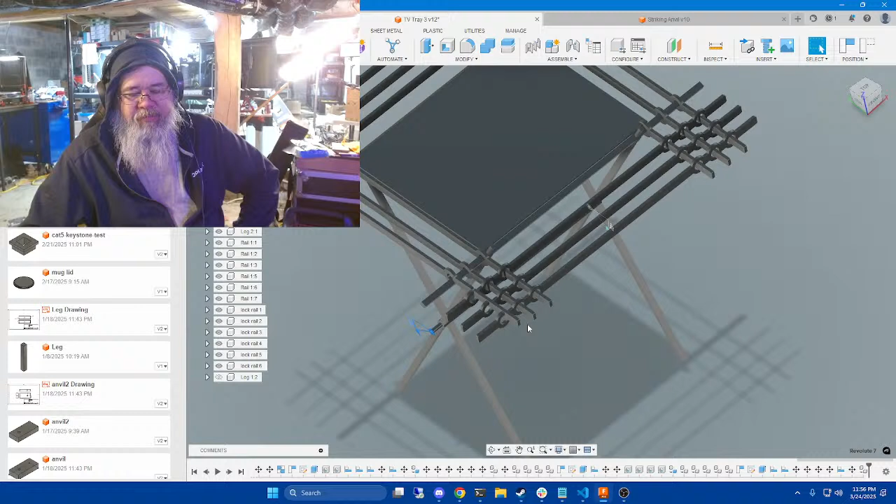I could reforge it, but I don't want to. I want to forge a new one, a thicker one. I think that one's a little too thin too. It works fine, but I always felt that if it was a little thicker and filled the slot in the stem, it would be a better key. It should definitely be more like a Morse taper.

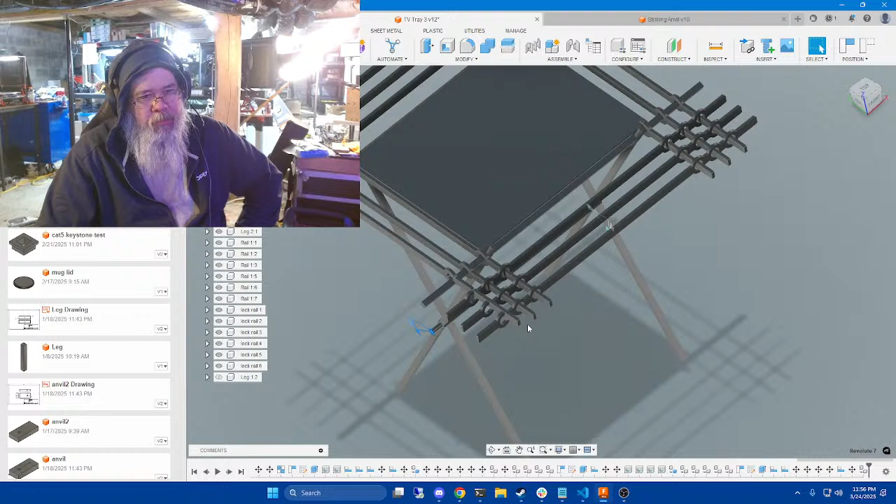A keyed-in swage set would be nice. I intend to have - I've got the one Jot made, and I've got a 60-degree V swage that Brian made me that I need to do the Hardy stem for. And then I've got a couple of others. I want to make a shovel swage because I think that would be fun with a striker. So those are just other things I'd like to make at some point - relatively simple.

The keyed-in flat block Mark made is on the bucket list. I'm not sure I know what you're talking about there - keyed-in flat block. Like his flatter anvil? A radius block? I don't know if I noticed that.

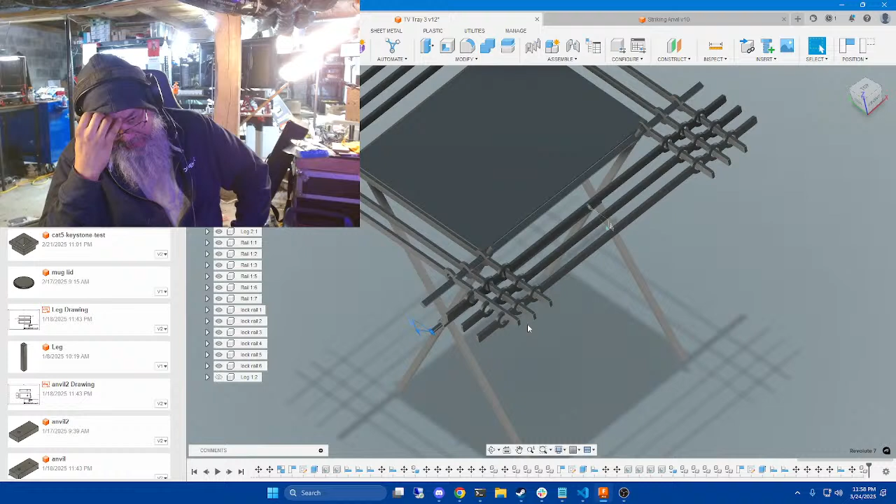But anything that you're forging on, if you can key it in to keep it from moving, I think it's better - it's ideal, you know. Honestly, the same would go for a cupping tool, like a cupping tool that you can key in, which would allow you to present the hammer or the billet. I'll see if I can show this.

You put it in a cupping tool, and it would allow you to present that billet at different angles. So even with a hardy stem, you stand the risk of this slamming into the side of your hardy hole. So by keying it in, you reduce the amount of movement capable.

But yeah, you'll present this billet with a drift in here. Wouldn't be technically this, but you could present it like this, and this, and you're coming in and getting it. But you'd use a sacrificial cupping tool for that because this side would be cold typically.

But being able to key that in would be pretty handy. Can't use a cupping tool that doesn't have a hardy stem on it, because you're just going to kick it out like a hockey puck. But being able to key that in, I think, would be pretty nice.

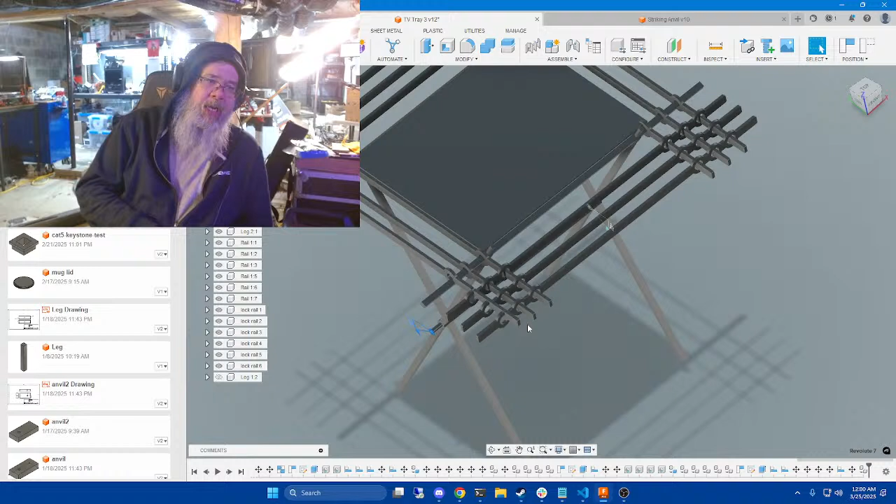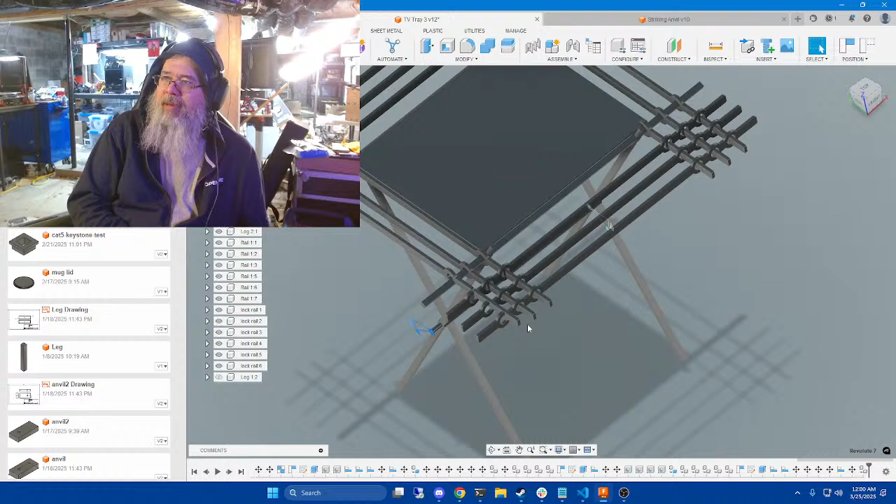So a travel keyed-in post vise, a game changer. Well, I'll tell you what - Clifton Ralph already did that. He had a post vise that dropped into his hardy hole on his anvil, which is sitting over at Kurt Fehrenbach's shop. So you can take it off that stand and drop it in. I don't remember if it keys in or not, but it drops into the hardy of that anvil. It's a pretty slick little setup.

But yeah, being able to do that on a striking anvil would be pretty damn nice. I've got several swedges that I'd like to make to start showing off the versatility of a striking anvil in the keyed system. One of the other things on my bucket list to do this year with the mill is a die anvil. I'd like to make a die anvil with my mill and be able to key that into the striking anvil and use that. I think that'd be really handy. These are all things I'd like to have done in time for Quad State to be able to show off.

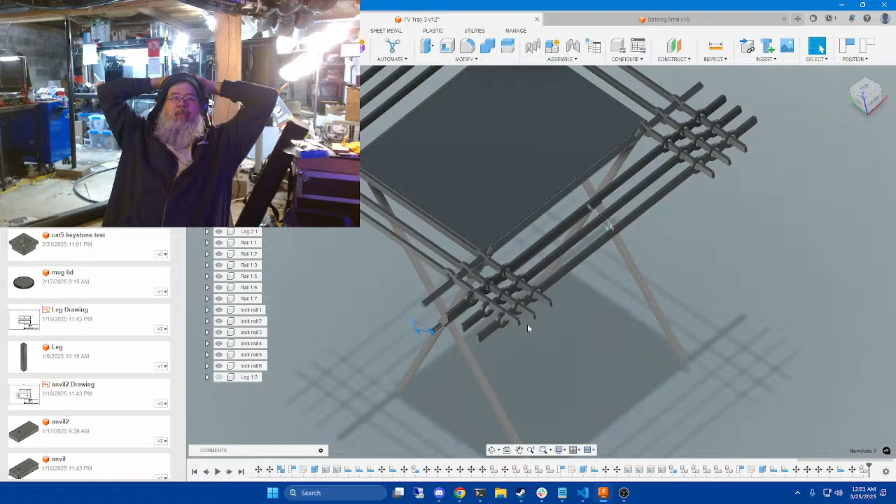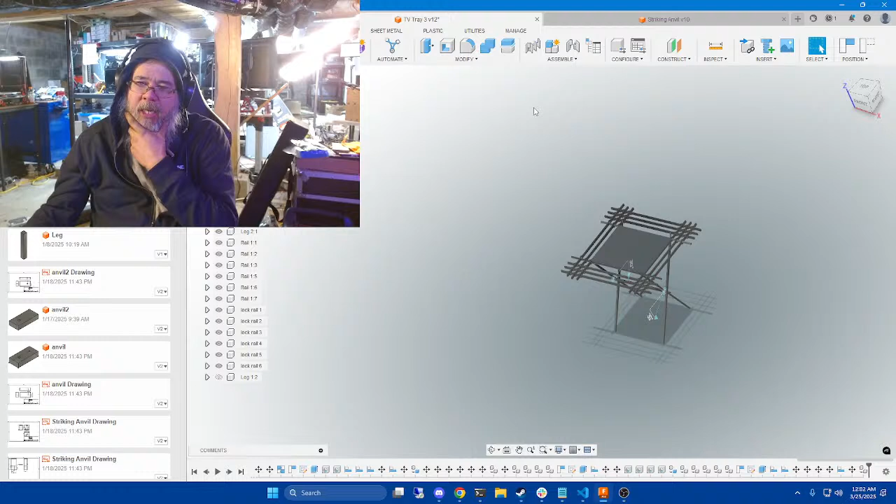Yeah, that's the TV tray for all it's worth. This was - I was excited to get this done in Fusion. I've actually 3D printed this before, and it is okay. It was a little thin. I might revisit this - I know more about 3D printing now, to pull this off a little bit better, execute a little bit better. But yeah, it was just the CAD itself I was quite happy with.

So anyways, let me close that out before I forget. Let me - I know I sent pictures back and forth of that TV tray with those other rails. I know I sent those pictures to Paul when I was doing it. This is not it. That's my travel tray.

Oh, when was that? That reminds me - this is my new anvil stand that I've not started working on yet, but this will be an anvil stand eventually. Need to cut this center post down a little bit, but it will become an anvil stand eventually. I think Chris Cash, aka Mount Phillips Forge, I think it's where I first saw that - he's got some stands where he used an old drill press base. It was a handy little idea, I thought, so I kept that in the back of my mind.